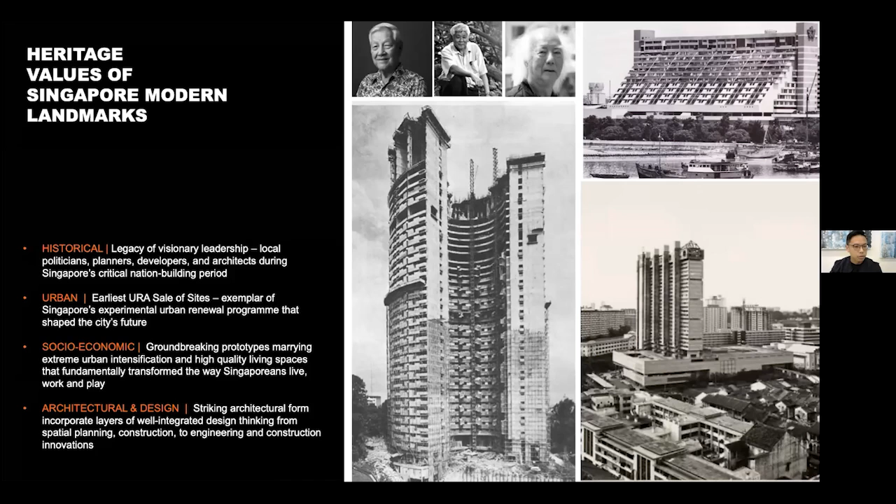So we invited overseas speakers, Historic England, Urban Splash, and we also held tours to look at some of these endangered buildings. Now, what we want to talk about today is the heritage values of our modern landmarks. Why are we so interested in them? Because they have an inherent value, because of their significance in our early urban renewal days. So that's why we're looking at that.

And the issues that surround them, basically, we don't have a comprehensive grading system. We have this, which is why it's also underappreciated, right? And there's also very poor management of the buildings estate, and also land use laws that sort of encourage speculative collective sales of these buildings. So these actually sort of led to the decimation of many modern landmarks in Singapore. And as you can see on the image on the right, most of them have been either demolished or some of them have been threatened, right?

So one of our first projects that we looked into was Pearl Bank Apartments. Pearl Bank Apartments, for some of you may know, is actually a groundbreaking prototype, right? Where you have split level maisonette units, right? And it also has a very groundbreaking broken cylinder kind of form that captures breeze and maximizes views to the outdoors. It was actually sold to a developer in Singapore called CapitaLand, right?

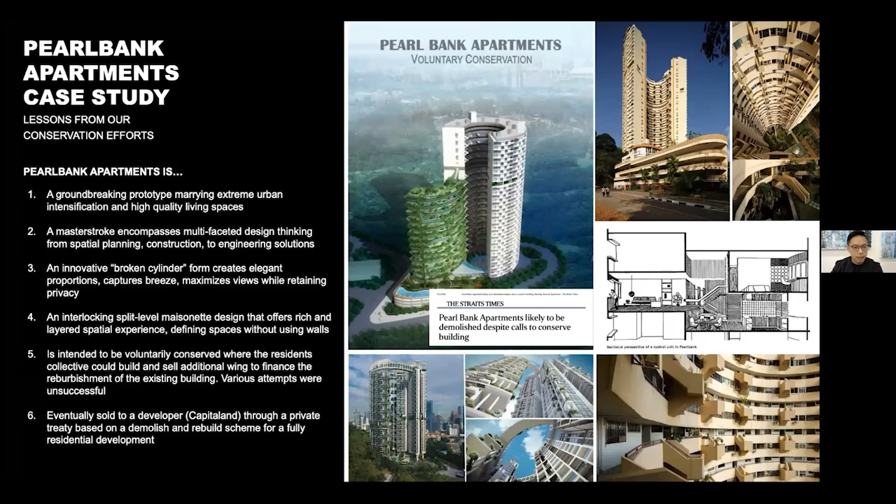And what we did was that in the background, we tried to persuade the stakeholders, CapitaLand, together with some of the authorities, to try to persuade CapitaLand to see what else can they do to the building in order to keep the building and not tear it down, right? So we looked at alternative schemes of assisted living because of its proximity to a hospital, all right, and trying to persuade them and see, hey, why not retain some of the building for this purpose, right?

And we also looked into, and we worked with an engineer in Arup, right, to see how can we sort of decant some of the building area to become useful GFA, and how do we take out some of the building in order to input new units that could cater to the new market, right?

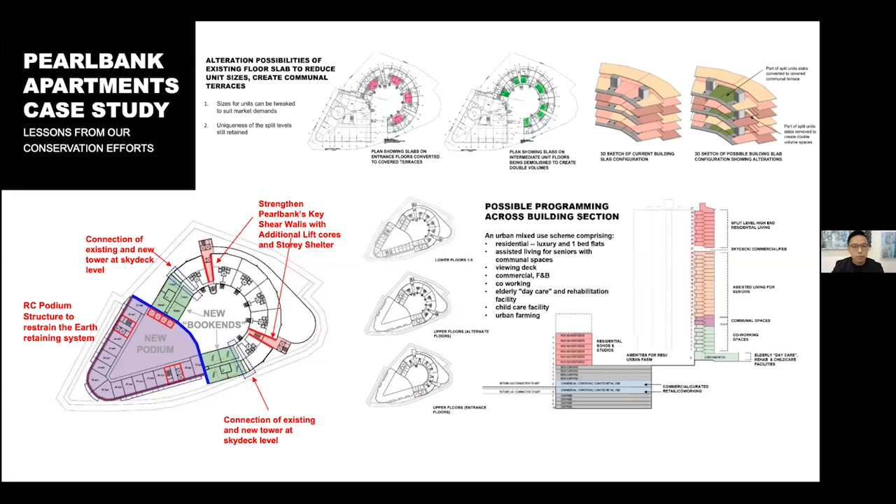So these were some of the efforts that we went through, but finally our efforts fell through because there were a lot of stumbling blocks, and there are primarily four issues. One is the lack of political will, lack of finances, lack of technical knowledge, and the lack of time. So these were somehow the take-home lessons that we got that sort of informed us what we should do for future advocacy work of this kind of nature.

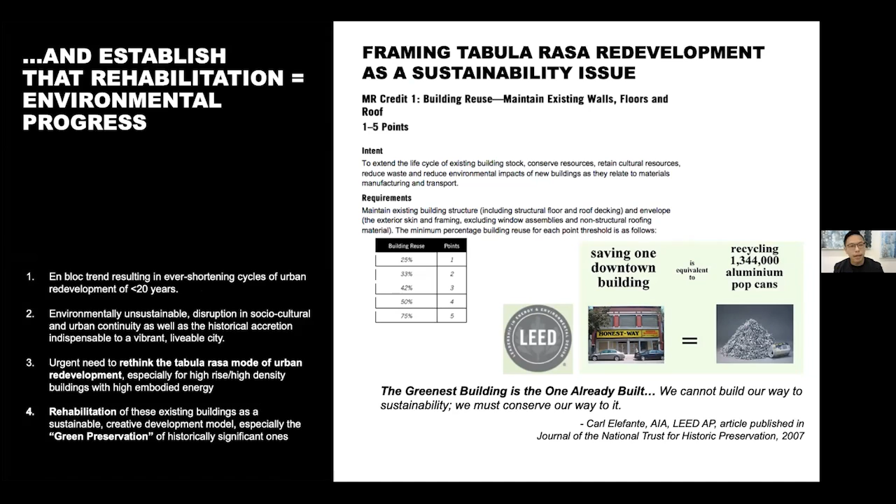So to conclude, I think moving us forward, we need to address policy issues. There are many things involved, like listing and documentation of these modern heritage buildings, coming out with frameworks for developers to adopt, right? So these are things that we need to look at. And finally, of course, we want to establish that rehabilitation equals environmental progress, like what Kara has said just now. So we are definitely aligned with the international community that conservation is in fact a way of environmental conservation as well.

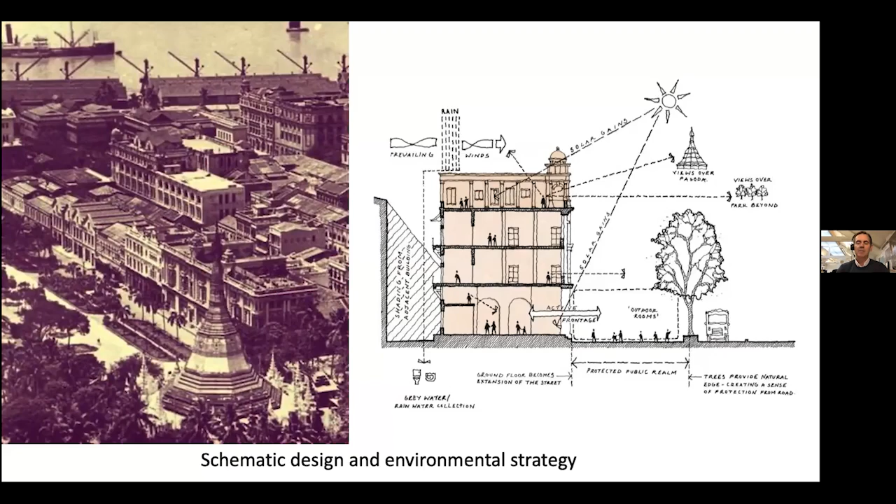100 years ago, it was part of a green city with shady pavements and a walkable street life. And we wanted to get these qualities back by opening up to the street, by creating low energy office space, and by maximizing the potential of the roof terrace. We also wanted to share a vision for the future to persuade stakeholders to support the project.

Internally, we felt that restoring key spaces sympathetically could add real value. This included the best of the historic interiors and using them to inspire new design interventions, but also that traditional environmental controls like opening windows and ceiling fans could play an important part in creating comfortable space.

And of course, we wanted to make the most of the roof terrace to enable the public to enjoy the views over special spaces, and of course, to create a selfie space to encourage people to come and engage a memory in a newly created city space.

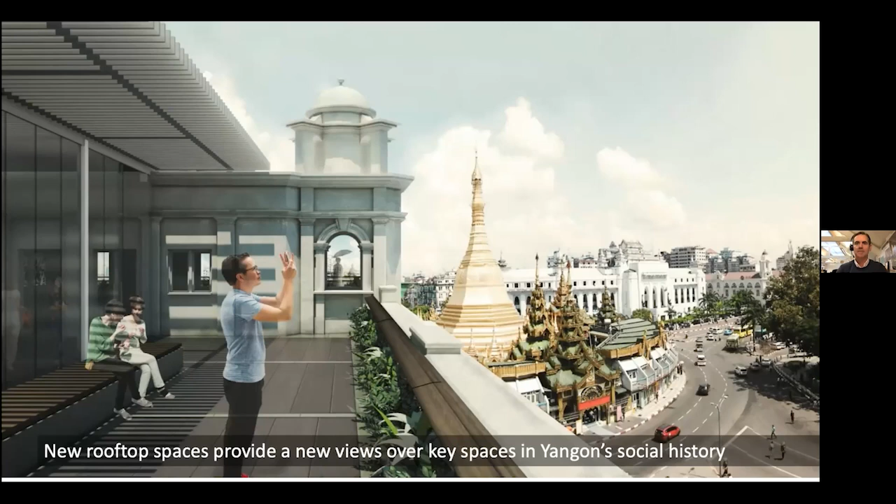Now, as part of the site works, vocational training was something that was very important, and it ensured that the restoration was undertaken to the very highest standard. It also ensured that the construction industry gained important new skills needed to repair many of the other important historic buildings across the city. So the project developed skills, and it also revealed skills that already existed.

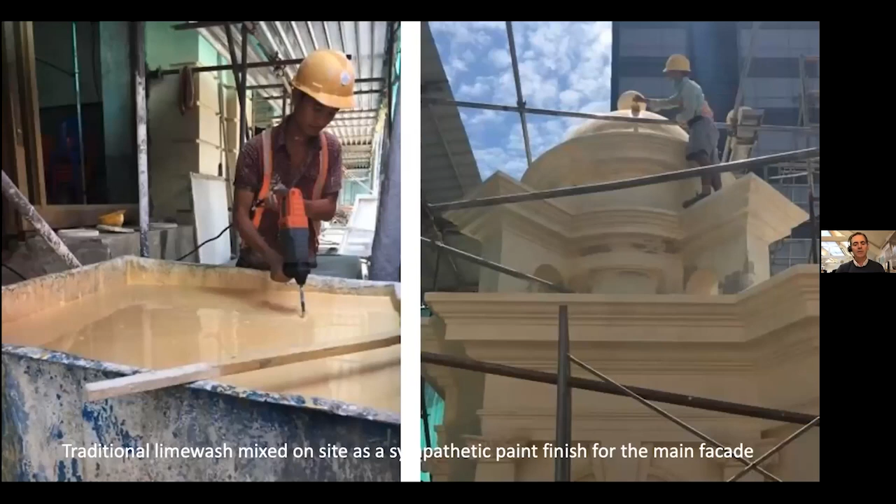And after repairing the main elevation, the training extended to traditional decorative elements. And here we can see lime wash, traditional paint being mixed and applied on site as a finishing coat.

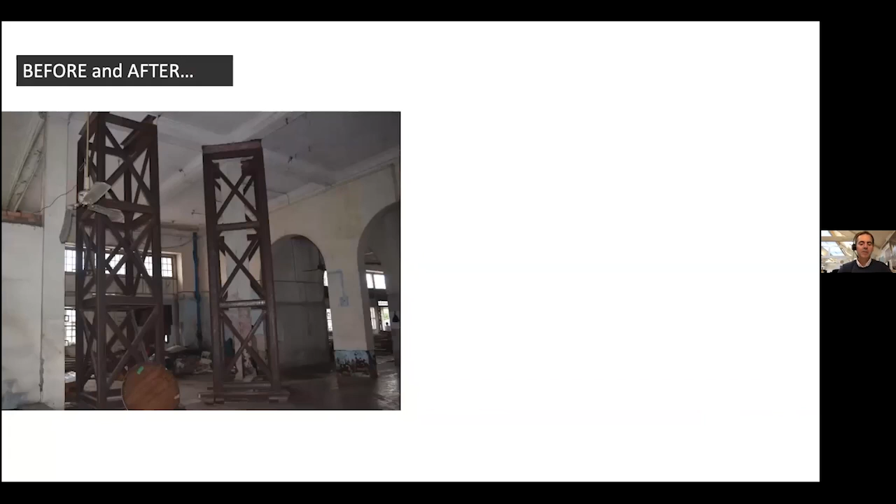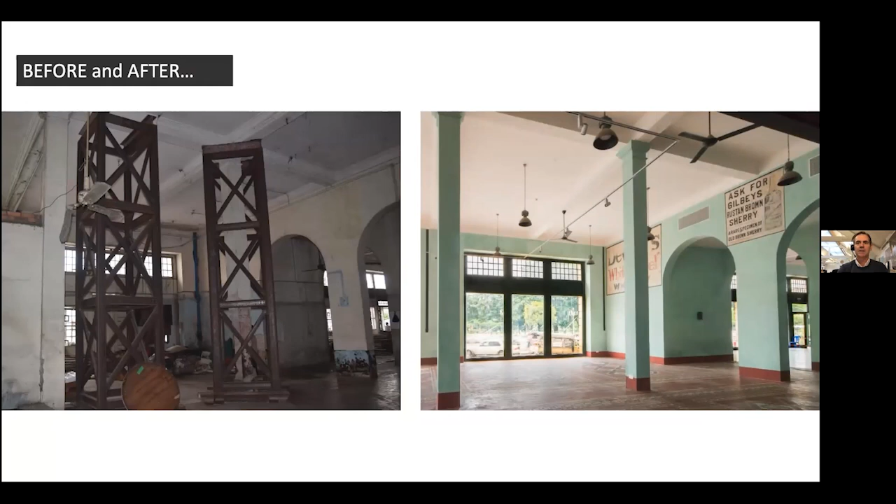And at ground floor, spaces which had been neglected and structurally propped have been carefully repaired. And here you can see some of those decorative floor tiles from earlier and some of the historic painted advertisements which were revealed and restored as part of the process. And those shop windows which now open up onto the street.

The project was opened in September 2019, and one of the key outcomes is that it now provides great space for new economic and social activity in the building. It literally has come back to life with new uses for all kinds of people in the community.

The second key outcome has been its demonstration of sustainable development. This image shows how we've responded to some of the UN Sustainable Development Goals, which has been an important way to start a new conversation for Yangon and to measure that in an international context.

And many historic regeneration projects have this opportunity. But most importantly, the project has changed people's lives. It trained over 500 people from professional design services to craft skills, including international and local expertise. And here are some of the project team on the scaffold at the end of the job.

But most importantly, I think the project demonstrates how saving global heritage can create important possibilities for professionals, building owners, politicians, and the community. And I think it's a great example of how heritage buildings can be repurposed for exciting, valuable, and sustainable reuses. Thanks for listening.

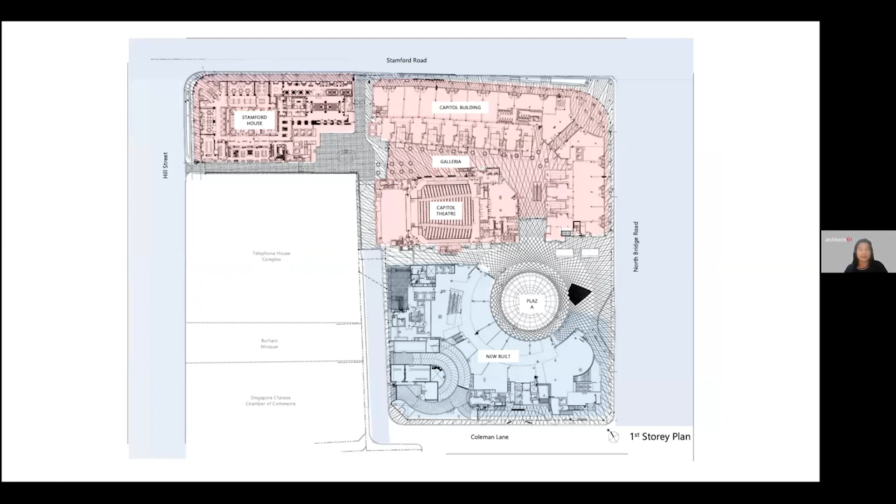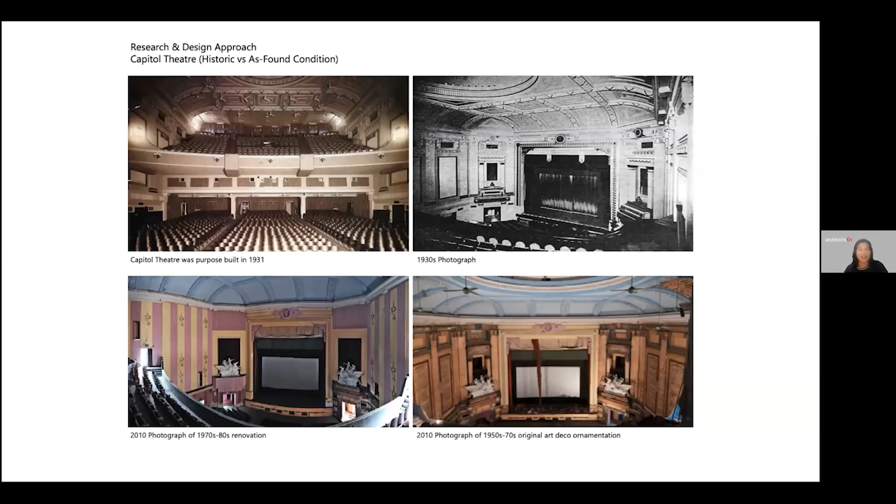I will share on the historical use of three buildings: Capitol Theatre, Capitol Building, and Stamford House, the restoration process, and how challenges faced were overcome to retain the original use in these buildings. Capitol Theatre was purpose-built in the 1930s for live performance theatre and cinema function. It was a building with ceiling fans and ventilation openings around the dome and sides. From the 50s, Art Deco features were added. However, renovations in the 80s covered these features. The last movie was screened in 1998, and the theatre was not in use for more than 10 years.

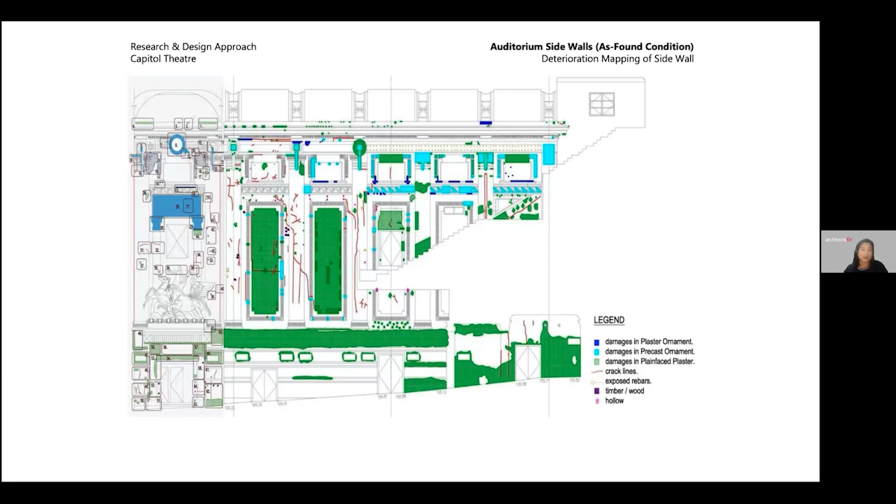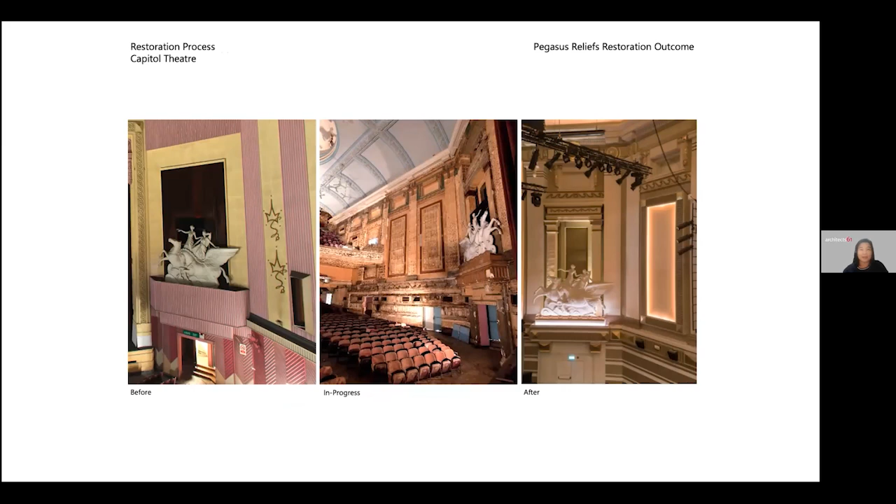We at Architects 61 were mindful of the rich heritage of these buildings. Many have fond memories of these places. Having done similar restoration work to landmark buildings, we were aware of the need for sensitive restoration. We found the walls to be in poor condition. 3D laser scanning and reverse molds were used to carefully retain and repair these Art Deco features in situ or prefabricated. Over the years, thick painting blurred the fine details of the Pegasus, so the many coats of paint were carefully scraped off, damages repaired, and the Pegasus was given a fresh coat of paint.

I was pleasantly surprised when we found some old ceiling marks on site. With this discovery, we reinstated the historical appearance using new acoustic ceiling panels, complete with gold gildings, to meet the cinema performance requirements. The old fly tower was demolished and replaced with a new one. In doing so, we had to make sure that the proscenium was well protected, especially from Singapore's wet weather.

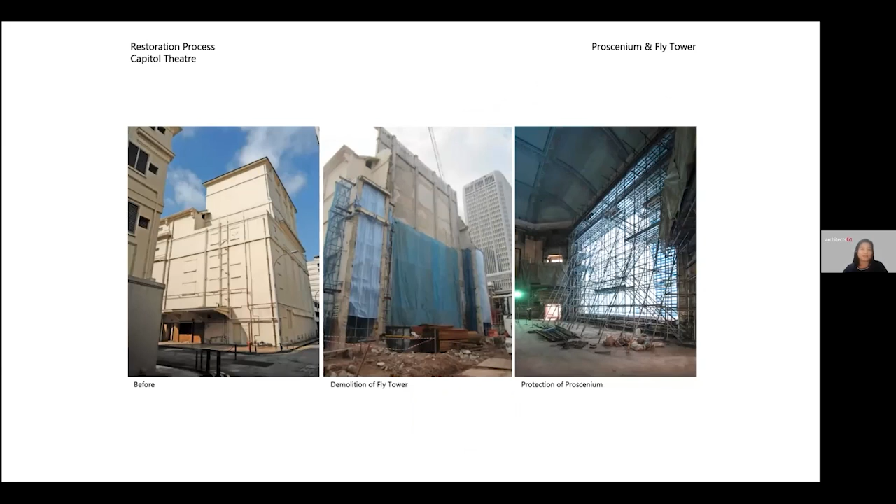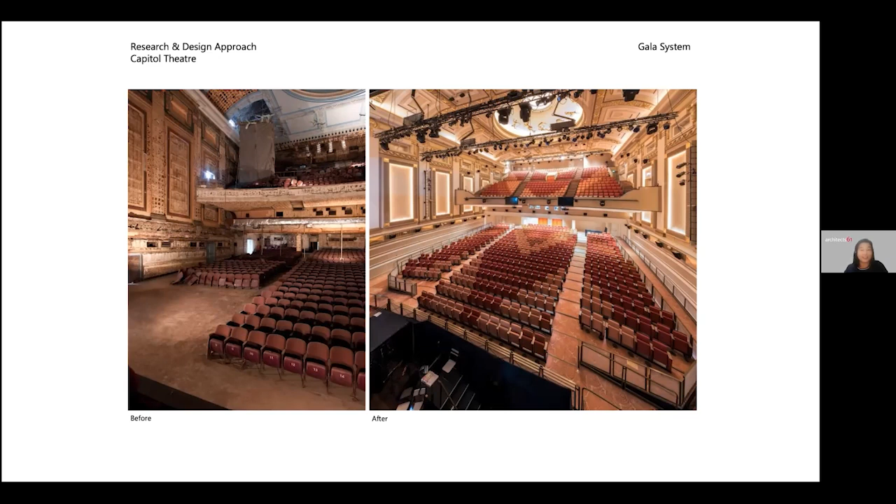One of the challenges here was to excavate a pit while keeping the structures intact for the rotational floor system. This allows the stall seats to be turned over and tucked under the floor for flexible seating configuration, including flat floor mode for wedding dinners. So Capitol has retained its original use, complete with the restored Zodiac painting and the original ceiling fans still in place.

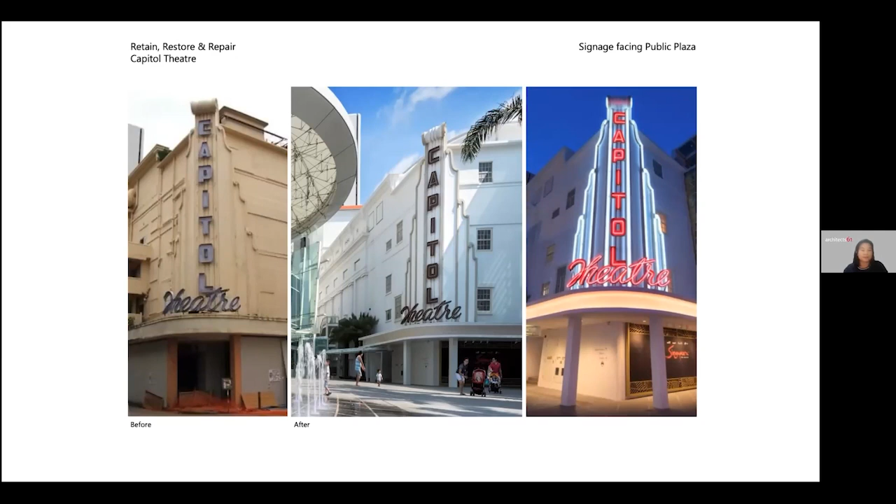One cannot miss the revived Capitol Theatre neon sign facing the public plaza. This plaza has a radiating floor pattern, which blends the new and the old in the entire development and creates vibrancy at pedestrian level for public activities. Here, with the new Galleria skylight, the once mundane back lane is now transformed into a lively place for alfresco dining. Capitol Building is once again a place for shopping and dining.

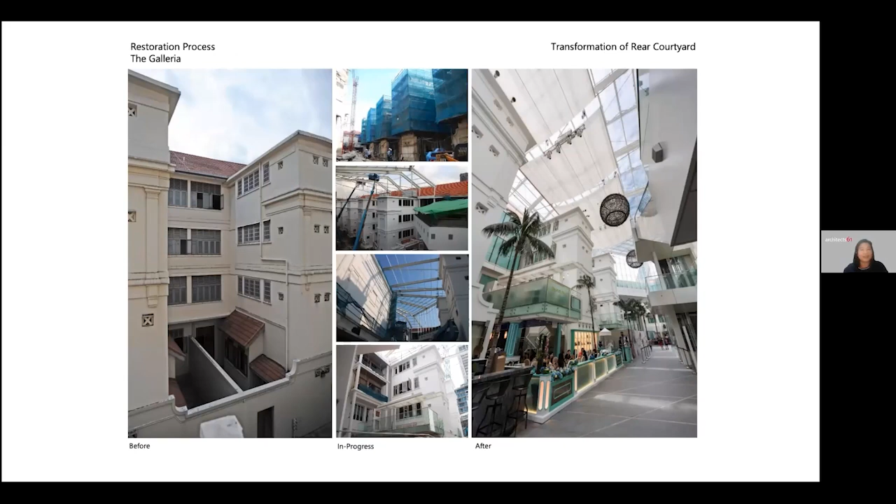From a distance, the changes in the before and after photos are not apparent, but there were significant efforts to restore these buildings. Second layer acoustic windows were added to levels 2 and 3, while retaining the first layer conservation windows. This was done to meet the needs of the hotel guest rooms facing the road.

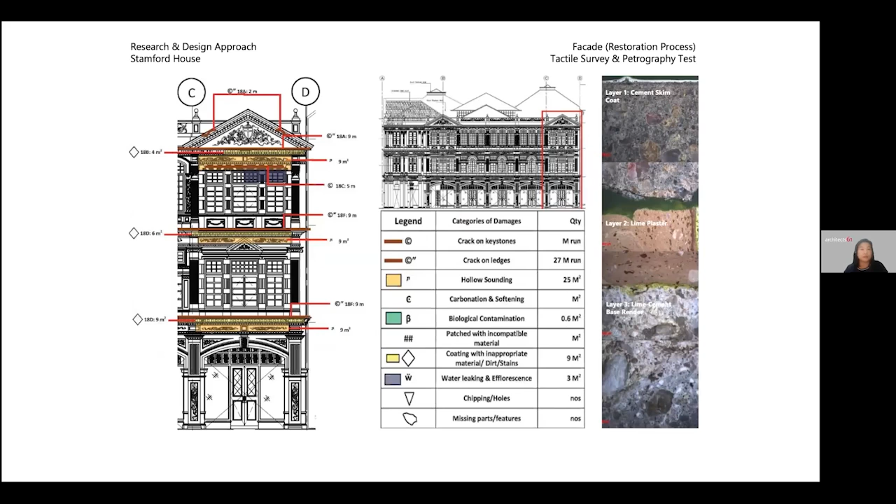Capitol Building has retained its original use at level 1, with all the shop fronts restored. The original structures were strengthened and the existing timber floor joists were retained. We conducted tactile survey and petrography tests, which showed that the brick walls were damp and soft upon the removal of the cement skim coat layer. These gave us a good understanding of the facade condition.

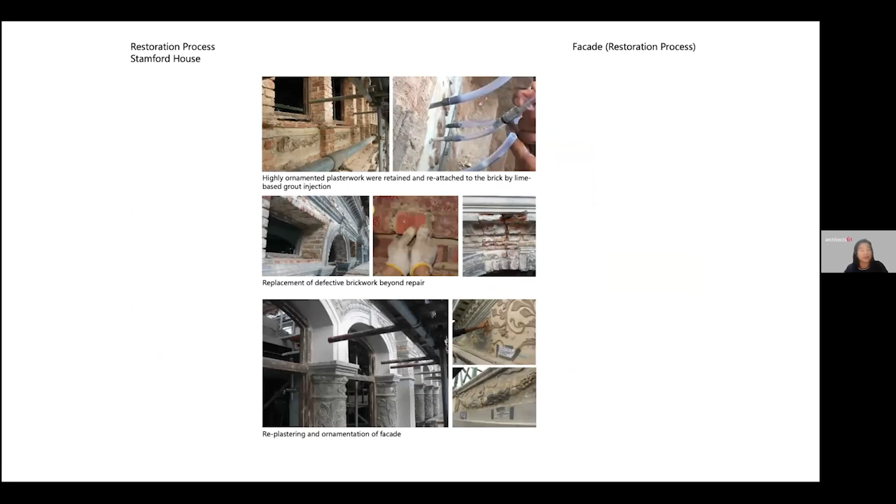I enjoyed site walks as we sighted the various stages of painstaking restoration work in action, like the repair of the plasterwork and the restoration of the highly ornamented facade. Due to ownership changes, the original interior layout changed several times. Interventions and modifications were introduced, such as the removal of the escalators and some columns. We added the atrium smoke barrier and a new swimming pool at level 4. So Stamford House is once again a hotel.

It is possible to retain original uses in buildings and sites. To do so, certain challenges will have to be overcome and solutions informed so that heritage is sustained into the future. With this, I end my sharing session. Thank you.

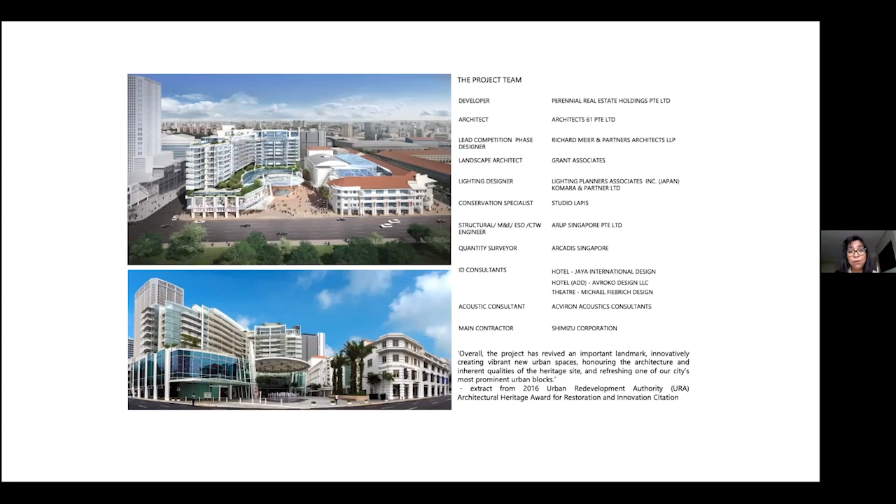Thank you, YK. It's really fascinating insight into the Capitol development. I must go and visit when I'm next in Singapore. We are now moving further north. Our next speaker is Jigan. Jigan is an associate and deputy chief architect at RIBA, based in China. He has extensive experience working internationally, both in Asia and also in Europe, on a variety of building typologies through different stages of design. Please welcome Jigan.

Hello, G. This is Stu here. Can you hear me okay? Okay. It looks as though G has had a bit of an issue there. Aslina, are you on the line? I am on the line. We're going to move to Peng Peng and we'll come back to G when we get him back online, if that's okay. Okay, absolutely no problem at all. Okay. Peng Peng, I'm going to hand this over to you.

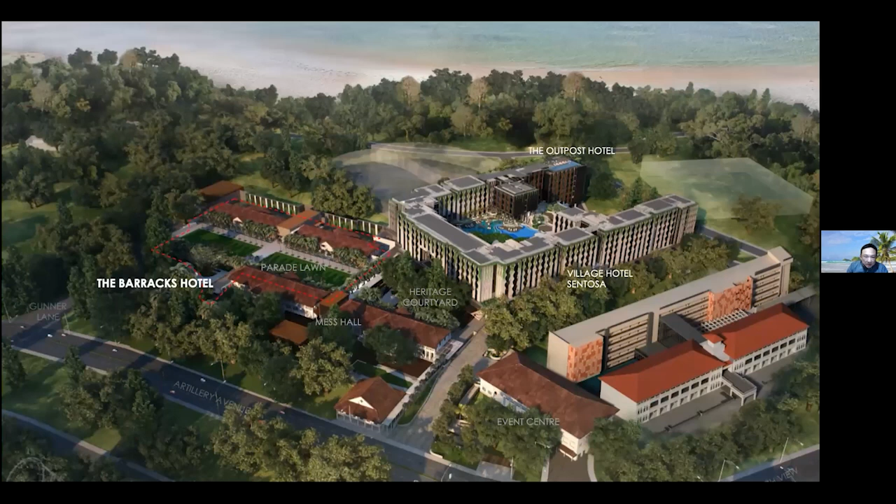And so this is the site when we found the project. If you look at this site, the rooftops in orange are all the conserved buildings. On the north is Resorts World, which is a big integrated casino. And this is the site. And we were asked to really conserve all the buildings in front on the ridge.

And the way we had done that was to build over the depression, but also kept the strategic parade square conserved, but in a new way. We thought about the hardness of the parade square becoming a soft lawn that could be a setting for a new kind of parade, a new kind of march, which was our wedding march.

And this place used to be the mess hall for the officers. It's become a new dining destination where cuisines from all over the world could be experienced. And the trees on the site were also part of our setting, and we conserved all the big trees on site and used the trees strategically to create an environment that was very close to nature.

And over here at the deepest part of our resort, we created a walled compound just to shield us away from some mechanical plants of a neighboring complex, but also to create like a secret garden, a garden that felt like a fortified garden, but a sanctuary for the resort.

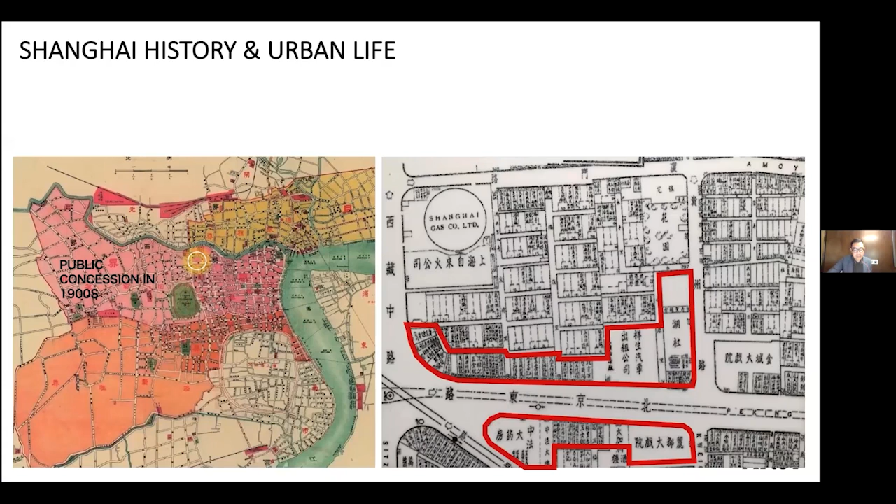Hi, this is G from China. Today, I'd love to share some experience about heritage buildings through one of our most recent renovation projects in Shanghai. About 100 years ago, there were several concession zones in Shanghai, and international architects designed many buildings here. And those buildings were not pure Western classic style, but also combined and considered some of the local lifestyles, such as the Lane House.

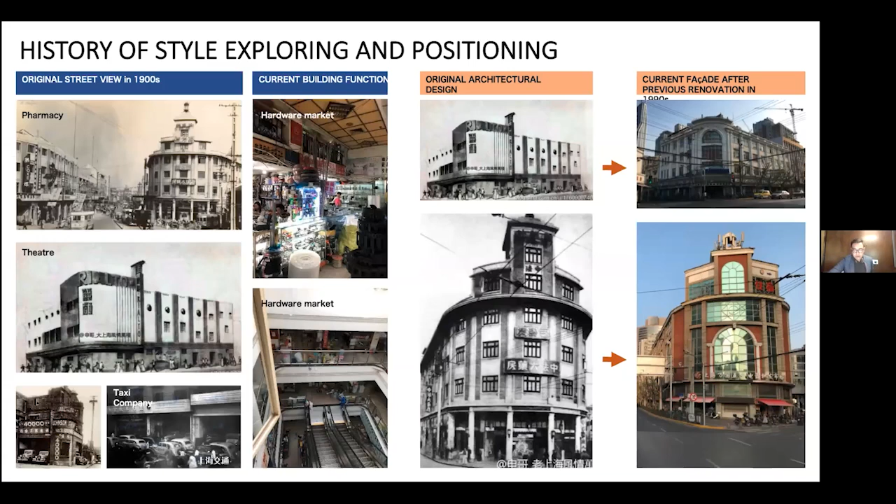The Lane House in Shanghai became a very unique architectural style, and a lot of people live in Lane Houses. From the site photo, you can see an old lady still living in this building, and she has her roof garden on the top. And our task was to renovate 8 buildings along a 200-meter historical street. In the very beginning, those buildings were a pharmacy, theater, taxi company, but nowadays the buildings are used as a hardware market mixed with residents.

And through 100 years' time, some of the buildings lost their original architectural aesthetic and values, becoming fake historical buildings. So how can we choose a right method to restore the valuable history? Build as original, or build as old, or build as new? For example, this building: the facade elements and the decorations are lost in the history, but the overall building and the facade geometry still kept the original rhythm.

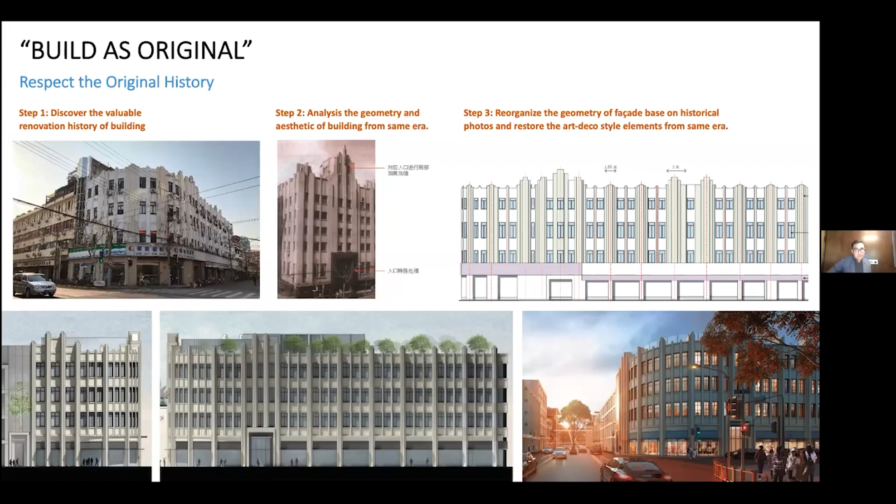So we did a very deep dig into the history from the archive, the historical photos, and also we analyzed the geometry and the aesthetics of buildings from the same era. We reorganized the geometry of the facade on the historical photo and restored the Art Deco style elements. So these buildings, we call it build as original. We think that's a respect to the original history.

And talking about build as old. So, I can't see the page change. Okay.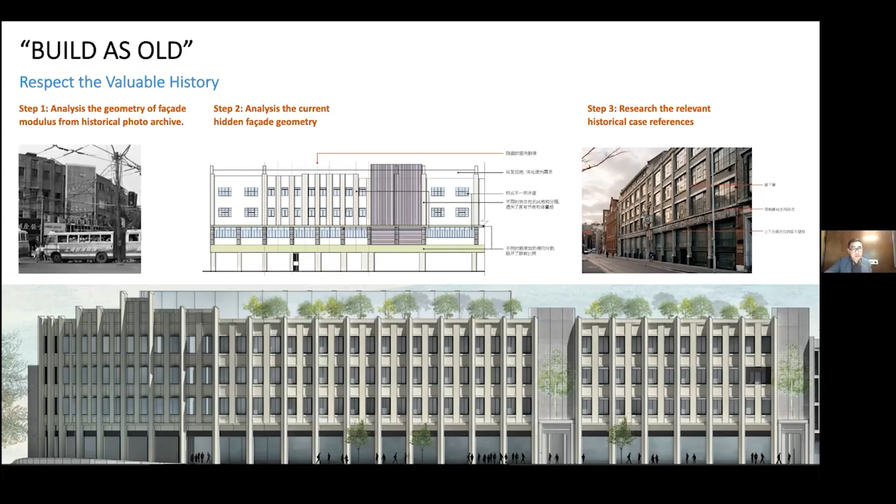Next slide. Okay. So

In this page, we can see those buildings on the corner. 100 years ago, that was quite a modern design. But in the 1990s, it became a very awkward, fake European style and was used as a hardware market. Originally it was a very famous theater. So we plan to restore the function and use it as a theater.

Okay. Okay, yeah, it seems like G is having another problem with the internet there. G, let me just check one more time. Can you hear me okay? Oh dear. Okay, Azlina, over to you. Yes, okay, we'll come back to G at the end to give him time to see whether we can get him back. For now, I'm going to hand over to our next speaker. Sorry for this, but I think it's part of the world we live in today. We are at the back end of technology.

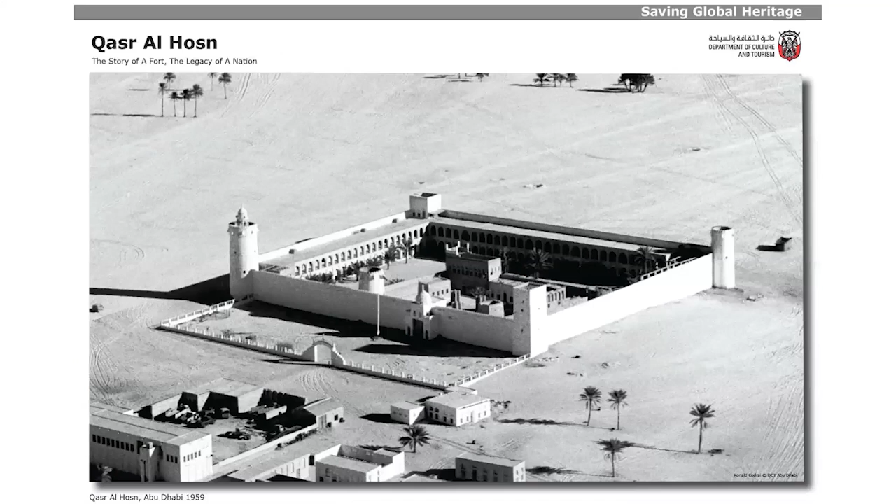At this point, I think we should also be mindful of the categorization of heritage by UNESCO, those being tangible heritage and intangible heritage. This case study is a key example of an immovable, tangible heritage, an architecture which has been strongly informed by the rich intangible heritage of Abu Dhabi, the human treasures that we carry within ourselves.

Qasr Al Hosn is a physical timeline of the story of Abu Dhabi. It's a building that started in circa 1760 as a watchtower, which marked a potable water supply, which became an impenetrable fortress in the mid-1800s and evolved into the ruler's palace in the mid-1900s, and remains to be this Emirate's cultural heart to this day as a museum of this people and the place.

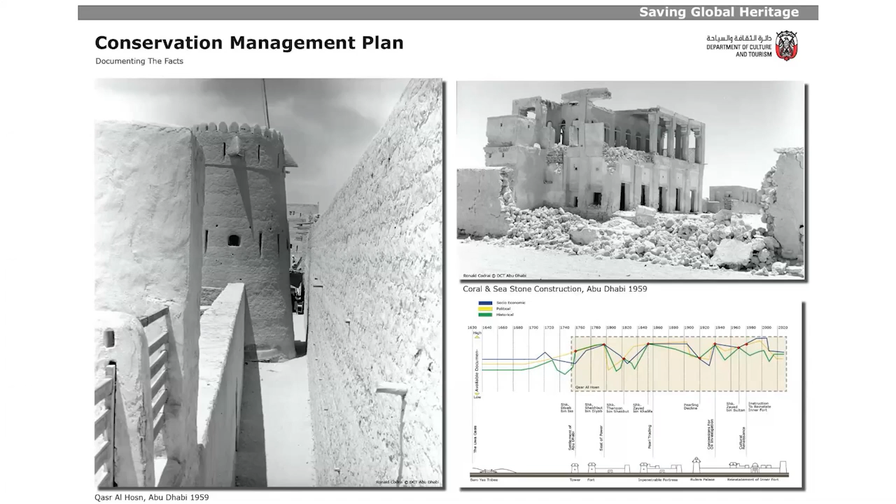The project commenced with a detailed conservation management plan, which, through the engagement with the local community, National Archives, and by undertaking physical investigations into the building fabric, enabled us to understand the significance of the structure, the sequence, and the substance of the enclosures and events that subsequently informed the conservation process. Undertaking the conservation management plan was a time-consuming labour of love, but it also made it abundantly apparent how much the local community held this building in their hearts.

Qasr Al Hosn was and remains to be the epicentre of their daily lives, a building that is treasured like a communal heirloom that generated stories which have become lasting memories transmitted by word of mouth from generation to generation, thereby creating a symbiotic relationship between architecture and humanity, the tangible and the intangible, the physical and the metaphysical. Storytelling is something that a qualitative historical restoration process should enable a building to do in its own right. In this regard, we believe that Qasr Al Hosn is an exemplar.

The concept design was to express the fabric and the authenticity of each of the building's eras of evolution and phases of construction. This would then enable the building to narrate to the visitor the political, social, and economical developments of Abu Dhabi through the fabric of the building, which witnessed a small sea-edge settlement morph into a modern metropolis.

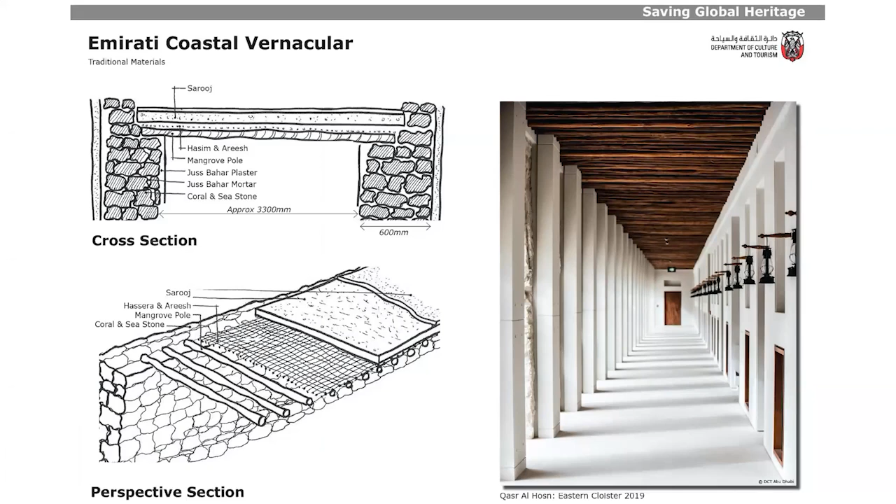The architecture of Qasr Al Hosn is of a vernacular origin, utilizing coral stone from a nearby reef for its masonry walls, mangrove poles from passing traders as beams for the floors, and the fabrication of lime mortar and render from the surrounding flats of gypsum, white sand, and crushed seashells. This render then gave rise to the building obtaining the colloquial name of the White Fort by the passing mariners who would sail by the Arabian Peninsula.

In the 1980s, the building was poetically transformed into an Abu Dhabi archive. The building, being a place of community memories, would now be a receptacle for the memories of a new nation, a nation that would be governed by those who sat in a modernized council chamber located immediately outside the building's walls. At this time, the historic fabric was informed by the introduction of modern materials such as concrete, engineered timber, and contemporary building services, trading traditional passive cooling techniques for more immediate modern mechanical means.

In order to conserve, restore, and reinstate the memory of the building, a team of experts from around the globe were gathered to undertake best practice methods of conservation. Artisans and craftsmen had to be carefully sourced and in some instances trained from scratch to enable the specialized traditional works such as date palm weaving, coral stone laying, and timber carvings to be undertaken in an authentic and sympathetic manner. This process not only preserved the building, but the intangible heritage of traditional craftsmanship.

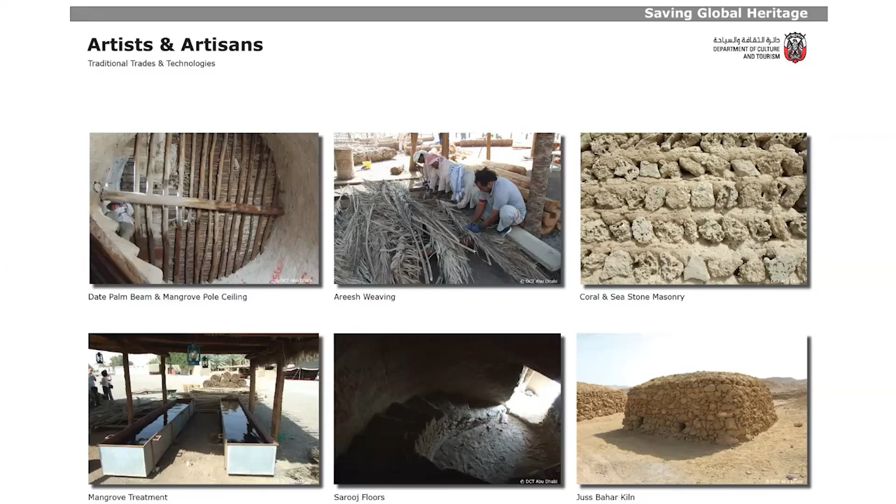The architectural composition of Qasr Al Hosn can be viewed as a series of layers and enclosures, which are intelligently composed to respond to the arid coastal desert conditions by providing passive cooling through courtyards, cloisters, and chamber walls to enable these interiors to become habitable spaces. The porous coral walls absorb the heat of the day like a calcified sponge and then dissipate the warmth in the evenings to mitigate the cold.

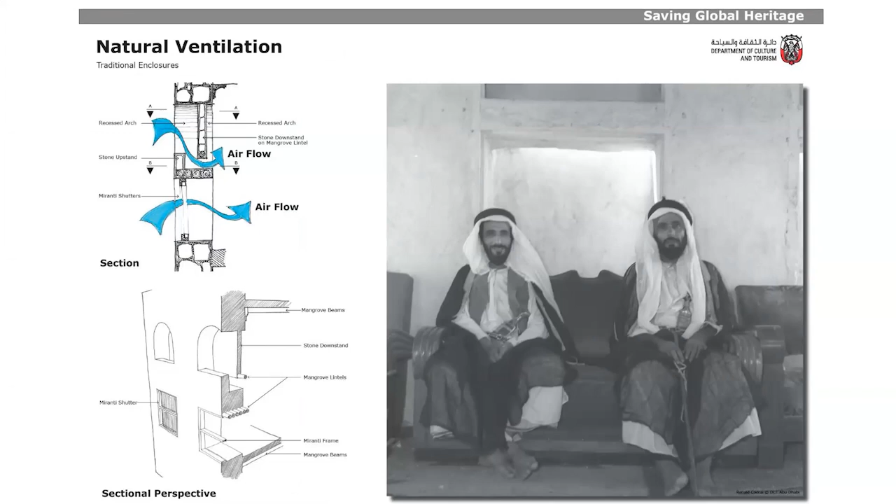The width of the rooms is predicated by the 3.3 meter maximum length that a mangrove pole will grow to. These dense timber beams are used to create narrow, lofty volumes, with thin slot openings in the external walls called bagiles. These devices channel a cool coastal breeze through a lofty volume to provide cross ventilation and enable the occupants to retain their privacy and shut the sunlight out by being able to keep the larger windows below closed.

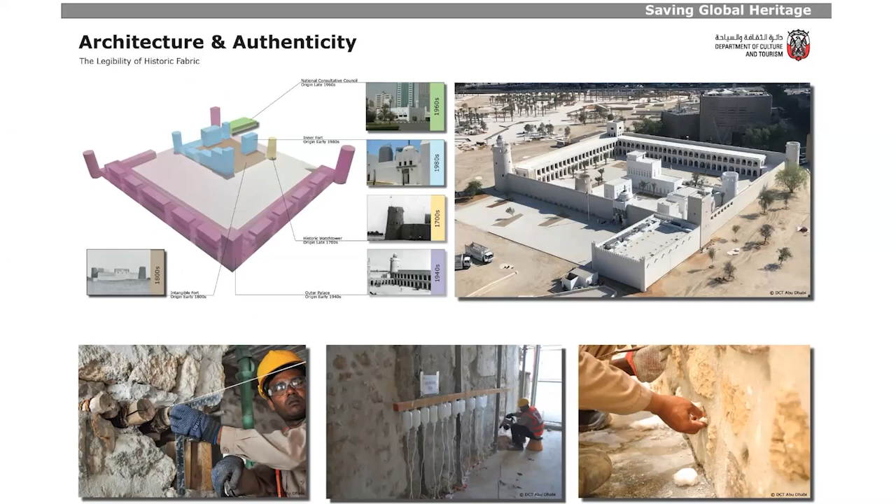The conservation policies and architectural concepts strove to present and preserve as much historic fabric of the eras of origin as possible. If fabric from the 1980s was adversely affecting the original fabric from a previous era, then it would be sensitively removed. If fabric of origin was in danger of becoming lost, then every measure possible was undertaken to retain it, even to the point of intravenously feeding resin back into historic timbers to reinstate their strength.

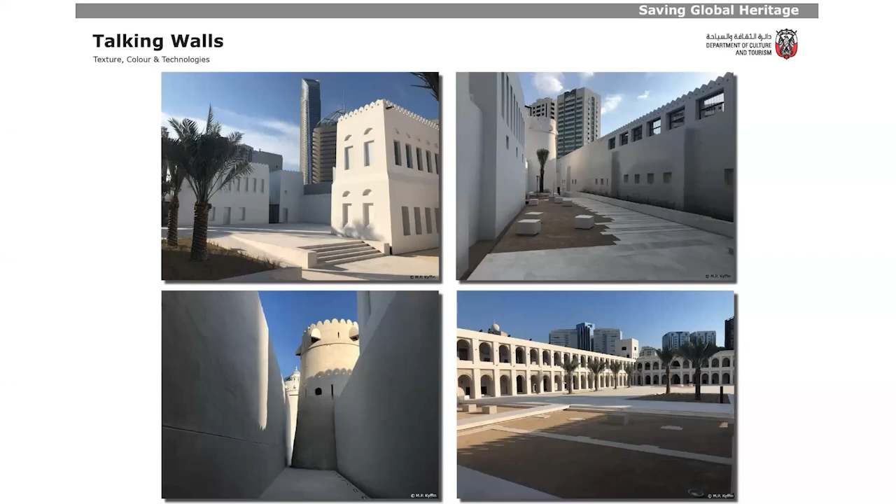The render treatment of the building walls has been conserved to their era of origin, but in doing so, they aid the visitor in their interpretation of the eras of construction. The changes in material, texture, and color are all related to a phase of the building's architectural evolution.

The dark brown render that we see here on the historic watchtower enables the oldest element of the composition to act as the anchor of the site. The founding structure of Abu Dhabi, which was first noticed in 1760, provides a sense of place and a significance that there are not many places on earth where you can physically engage with a structure that started a place

that united a nation. The tactile render of the outer palace walls transmits the honesty of the 1939 to 1945 coral and sea stone construction that lies beneath it. Walls that were built by a local community in times of hardship arising from the boats that would have provided passing trade connections with India being otherwise engaged in global conflict.

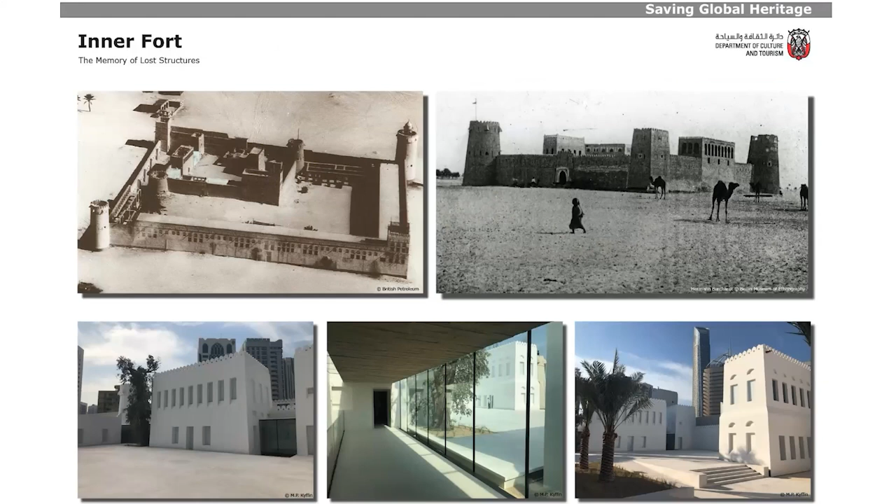The smooth white rendered walls are those of a more modern era. They represent the original fort which occupied the space in the 1800s. Through the use of modern materials and the sharp cornered smooth white surfaces, the building is readily identifiable as a later addition to the ensemble, and the glass links act as a memory of lost structures from the original and now serve as transitions between the gallery spaces.

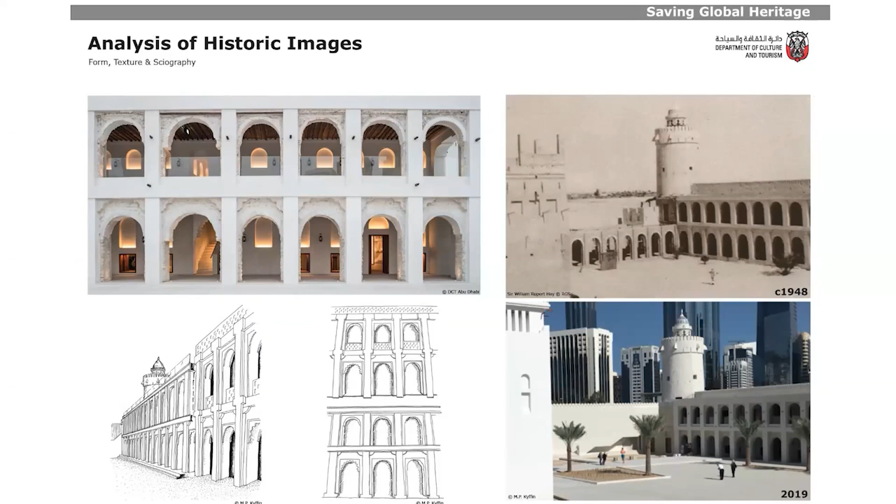An extensive amount of analysis was undertaken into high resolution historic images to help us with the reinstatement of details in plaster, render bandings, step facades, to undertake them as per their origins. Even studies into the depths and directional alignment of shadows were undertaken to identify the locations of lost structures and the thickness of render bandings that were in need of renovation on the facades.

Numerous archaeological findings were discovered during the works. Extensive investigations were undertaken prior to the commencement of works in areas where remains of lost structures were suspected to be. The remains of significant buildings have been showcased and interpreted for visitor engagement and understanding without fabrication of heritage.

The works to Qasr Al Hosn not only conserved the building, but its context as well. The landscape works served to reinstate the coastal desert setting in which the building was originally conceived, enabling the visitor to understand the vernacular and almost monolithic connection between the building, the people, and the place, which takes us full circle in this talk as Qasr Al Hosn still stands to this day as the cultural heart of Abu Dhabi.

As one would expect from a fortified structure, the building is strong and functional, but to fulfill the full Vitruvian definition of architecture, there is a beautiful manner in which these pragmatic and structural attributes are carried out. The architecture not only has utilitas, firmitas, and venustas, but has touched the hearts of many through memory, meaning, and its timelessness. Thank you.

Thank you, Mark. That was very good. Thank you. It is a beautiful building. I very much enjoyed the tour that you gave earlier this year. And I really love those old photos as well.

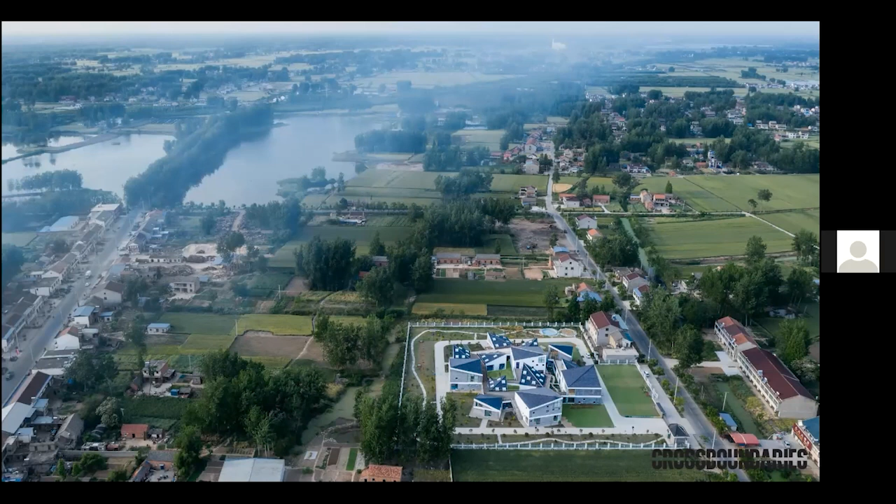Hi, Dong. There seems to be a 3-second delay, so if you just want to bear that in mind. Sorry to interrupt. We'll add another 10 seconds onto your time. Okay, sure. So now, okay, now we're back to the first picture with the bird view. Are we on the same page?

I hope so. From this picture, we can see it's a typical countryside in south of China with a morning fog. And you can see most buildings here are 1 or 2 floors of bungalow buildings, either private houses or workshops. So when we were called to build a kindergarten here, this is a 5th tier city or town in China.

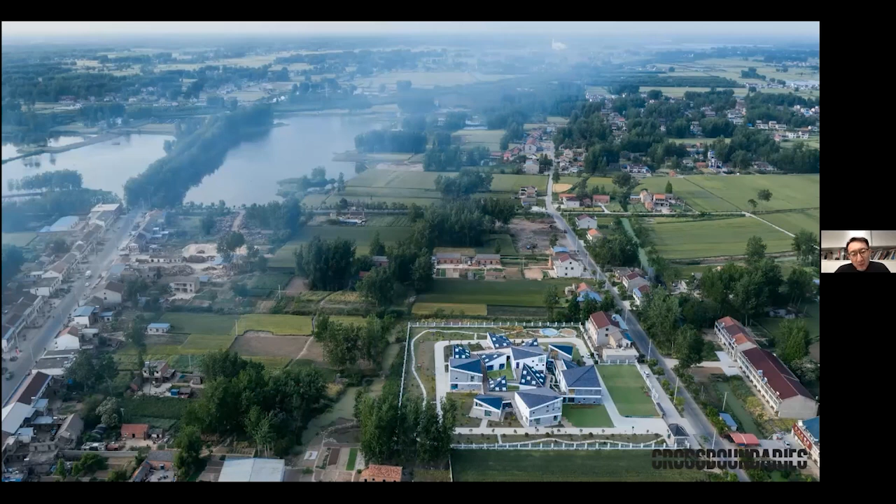So instead of, as everyone did in the neighbor village, building a 3-floor concrete block with a crispy color outside, we were thinking how we turn this kindergarten to respect the neighborhood. So that's how we call it a village in the village. So instead of building a centralized concrete block, we constructed a cluster with all the classrooms independent, forming a group. So here you can see on the picture, also each building, we applied the local architecture style with a pitched roof, slope.

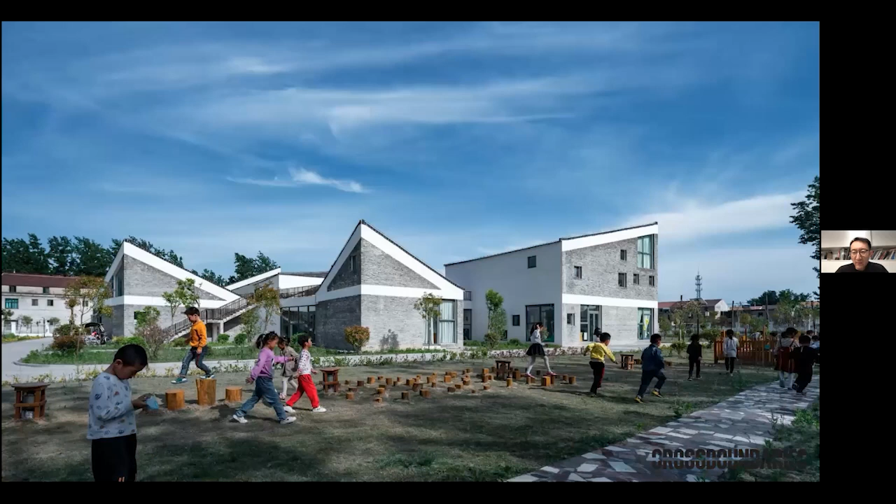As most of the Chinese rural countryside is experiencing today, most young adults and young parents have all left for the big city for a better life. So in all those villages, the typical situation is that the elderly and grandchildren are left. So how do we give life back to the village? So this is also when we were commissioned to construct this kindergarten. We were thinking, actually, with the openness of the kindergarten, this can turn into a community center at night, while during the daytime, the building functions as a kindergarten.

Oops. Next, it's not moving. Can you still hear me?

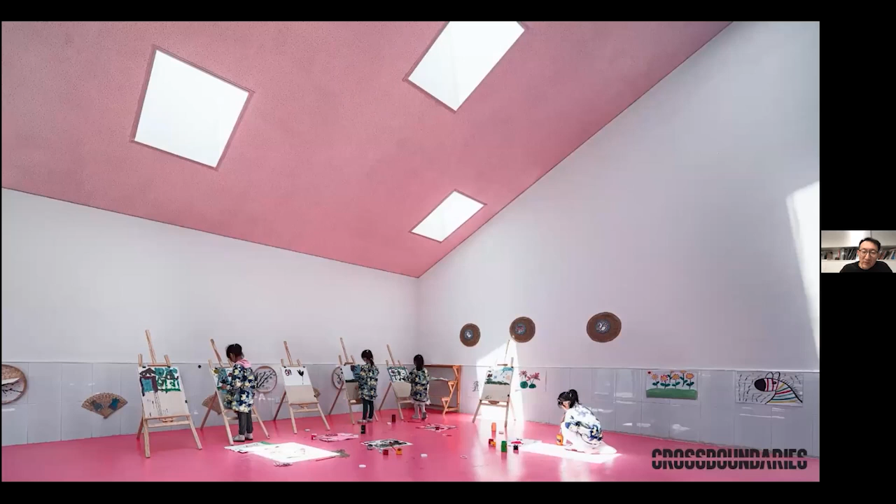Next. It is changing. It's just taking a second to catch up with you. Okay, sure. I just need to be patient. Still not on my screen.

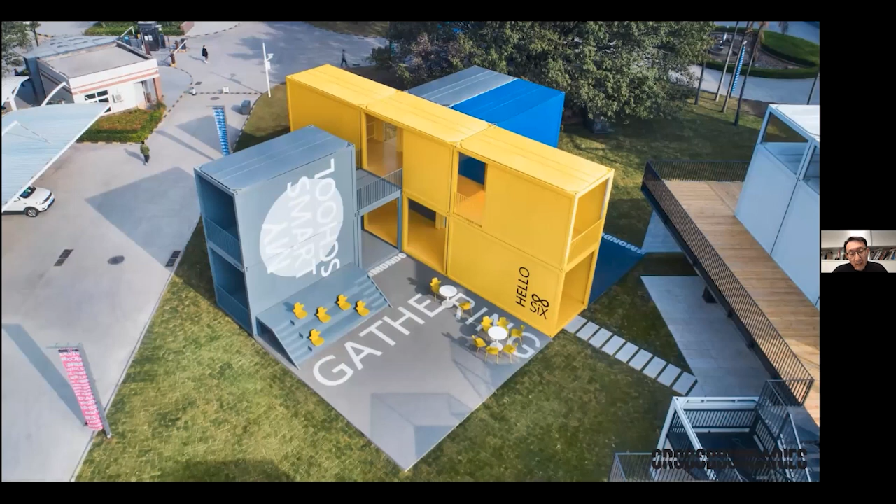Next. Okay, this is the new. While we are doing new, how we can save energy and save the environment, that's also something we consider. And this is the light structure we built last year for the Shenzhen Hong Kong Biennale 2020. Actually, it's a pop-up school. This structure doesn't require any conditions for the foundation. It can be built in the factory and constructed within 5 days. So this actually gives us more possibility to deliver pop-up schools. Particularly today, during COVID time, this structure can give more possibility for open-door, open-air learning space.

And for this space, we concluded 6 features. Because today, the modern school requires collaboration space, private learning space, and being very open to the outside to let the kids connect to the surroundings, and also being very communicative within the structure. And rich color and material for children to experience. So this is still sitting on the site, since even though the Biennale is over, the landlord decided to keep it as a pop-up learning center for their own company.

I will go on. So now you can see this is a gathering space and a sports space, all constructed within these 200 square meters. The limited square meters offer the maximum possibilities. Here you can see the yellow cross, which is the master plan for our buildings.

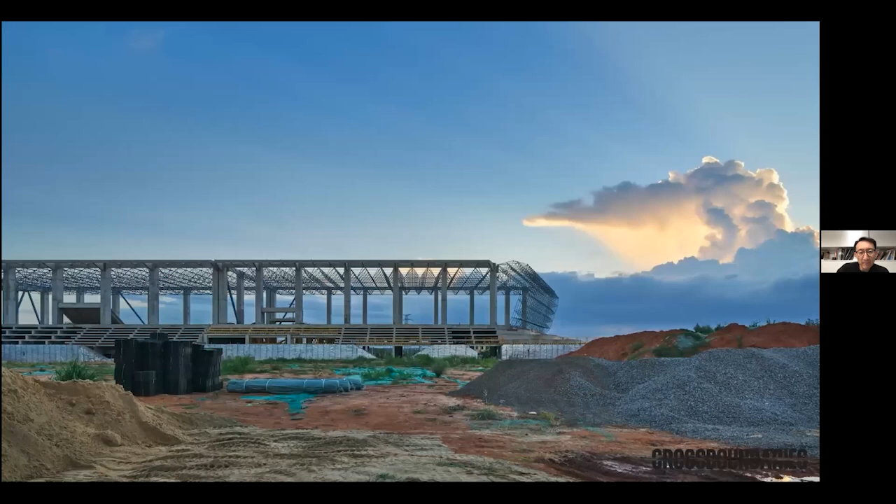And the last 2 pages, which I'm going to show, are actually a 110,000 square meter school we are constructing right now in Hainan, which is in the tropical area of China. It's an island. Even though it's a massive construction, we still take the local tropical climate into consideration. Here in the center, as you can see, the half-done steel structure offers an elevated building for natural ventilation, for energy saving. Plus, in contrast with the high-rise background, we provided a very horizontally extended school learning space. This is also an answer to the local structure and the local culture.

Okay, thank you, everyone. I hope the page reached the end. Thank you.

Thank you, Dong Hao. It did, and it was a fantastic presentation. And I really want to go to Hainan as well, the tropical. It was dubbed the Hawaii of China. Very much looking forward to going.

Fantastic buildings, particularly the one in Shenzhen as well.

We are now going to go back slightly south to Malaysia and welcome Mustapha. Mustapha Kamal Zulkarnain is the principal at Architect Mustafa Kamal Malaysia. Mustafa is a fellow member of PAM, the Persatuan Arkitek Malaysia, and is currently a member of the Housing and Urban Wellbeing Committee. He's also heading the task force in PAM's strategic plan for 2030, architecture cities now and future.

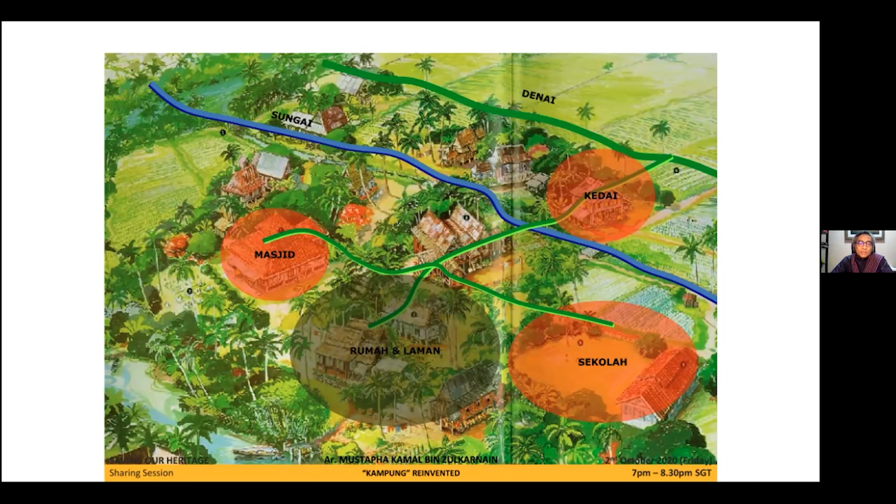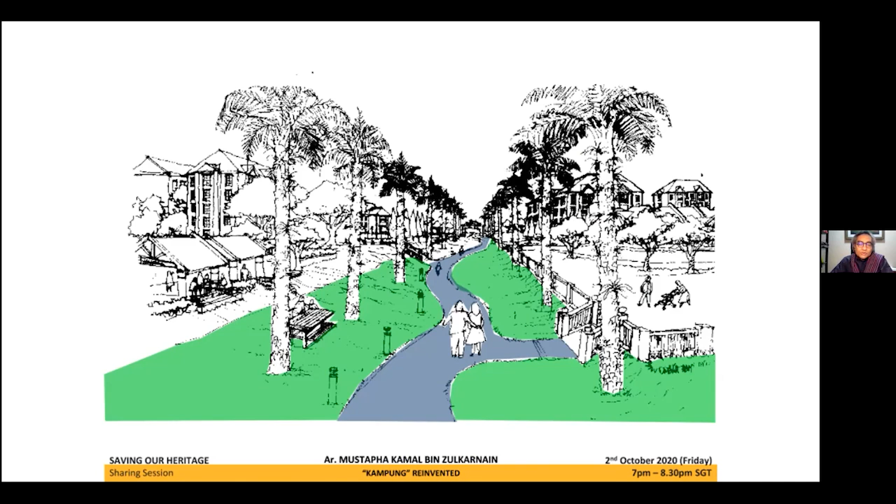These informal gardens are going to be the starting point that I'm going to rejuvenate and celebrate in our modern demands of townships. This is where the culture of the kampungs is now being brought into the urban scene. Starting from the house with the lots by itself, now it can be informal between clusters, or you can have a central open space.

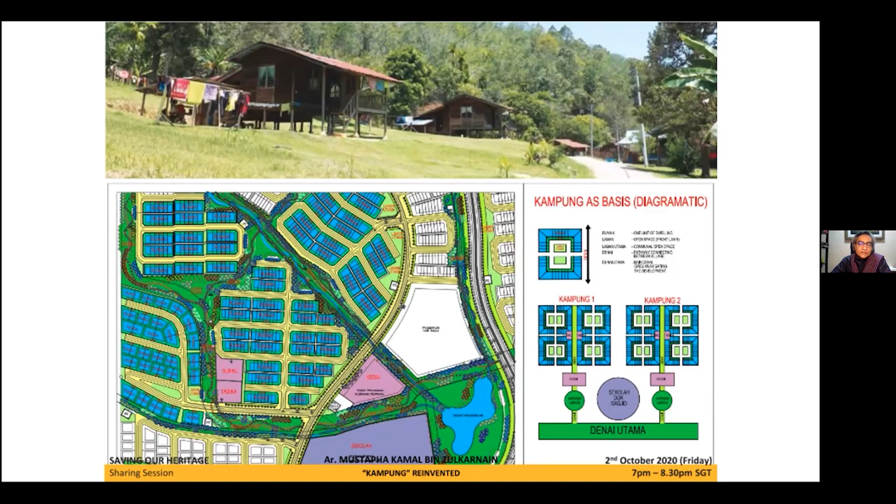But here in this township in Klang Valley near KL, we try to house about 450 hectares, and we use the kampung principle to create these buildings sprinkled onto the lawns and onto the landscape. Those greens are spaces in between, just like in the heritage kampung, where you have the blue way and the green way, and you have the thoroughfares. This creates the cross ventilation for the township. So this is what we are trying to enliven, rejuvenate and celebrate.

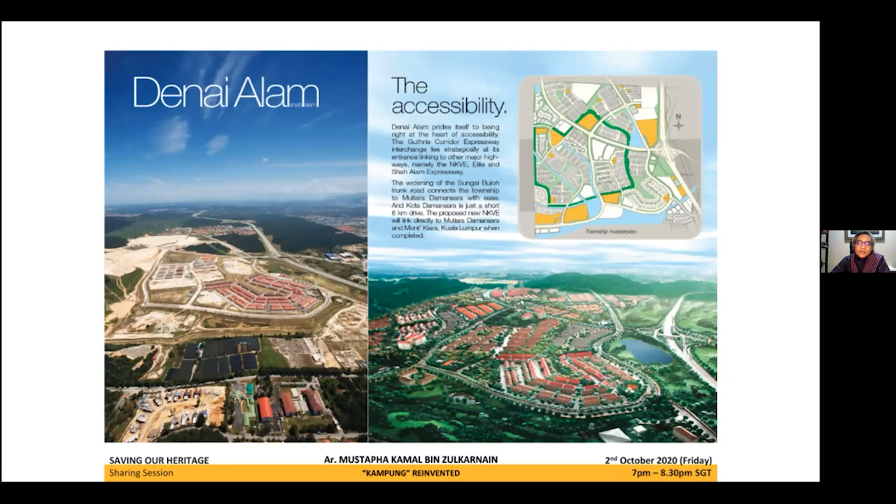From here, we even have the lakes to create the breeze and better usage even for the animals. I love it because there's a horse riding school next door, so the horses come here to graze the lawn. It is a circumnavigation of 5 kilometers of walking trails that creates this Denai. Denai Alam is an award-winning township with about 40,000 people staying here, on undulating terrain.

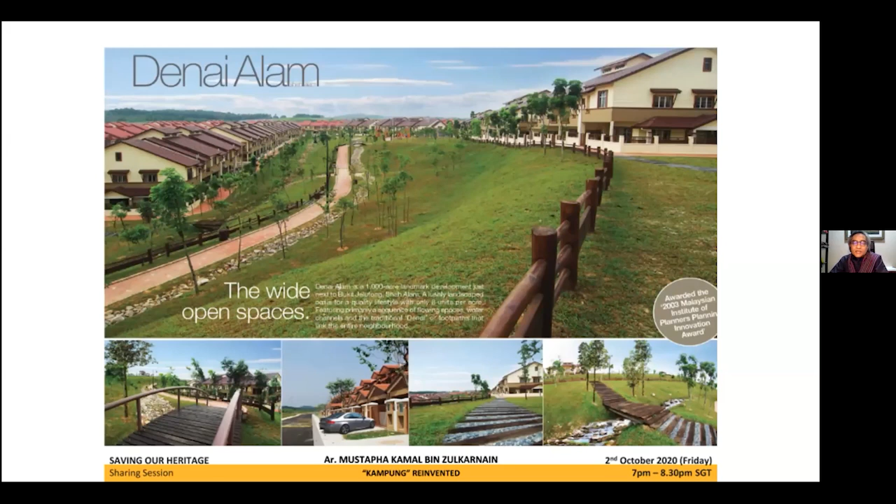So from that kampung principle, we try to take the best of the kampung and put it into an urban context so that people can still feel the essence of the kampung. The trails are part of the jogging track, where children can go to school, and also a security feature where the housewives can see who walks along the streets and the pathway. So you don't need to use the vehicle.

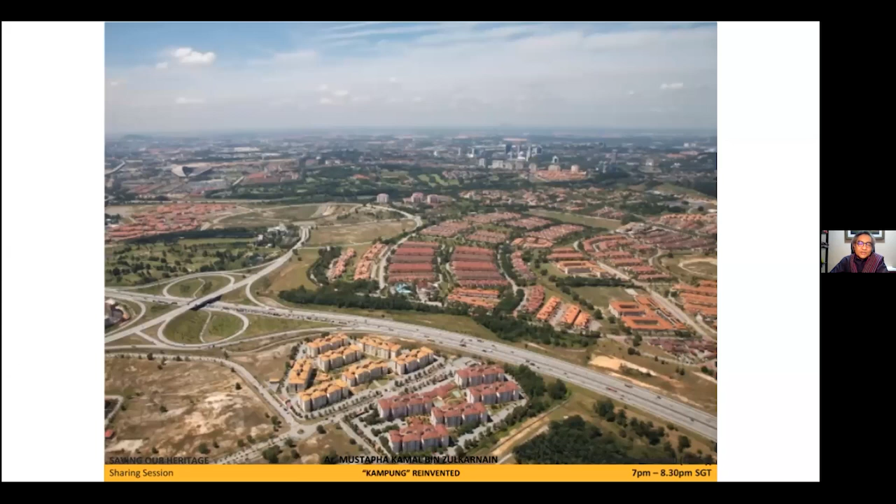You can see they're interconnected between the neighborhoods, the clusters of housing. You have neighborhood shops and green trails that go along. You can have a soccer field and a congregation of trees for recreation. Because in the tropics, you don't go out in the middle of the sun to bask, you try to run away from the sun, but you still have this breeze. So this is where cross ventilation is very, very crucial.

This is one of the ways we feel that, especially in the pandemic now, the kampong way can be used as healing corridors. The very strong greens and blues create cross ventilation around these 452 hectares so that people feel the breeze go through, the permeability of a township, just like in a kampong. So you have this beauty.

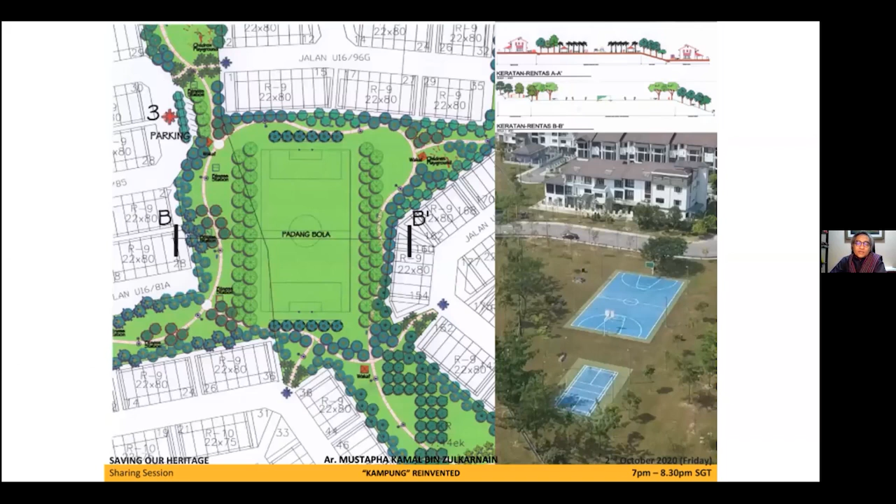The width of the open space has a hierarchy, and people can enjoy the lakes and have bigger parks in the center of the crossroads, where you can have a soccer field. So you don't have to drive to the park. You can walk, starting from your home. Anywhere is actually a park. That's why we call it Denai, because Denai is a green walking trail. You can have the soccer field, or even group courtyards for basketball or sepak takraw.

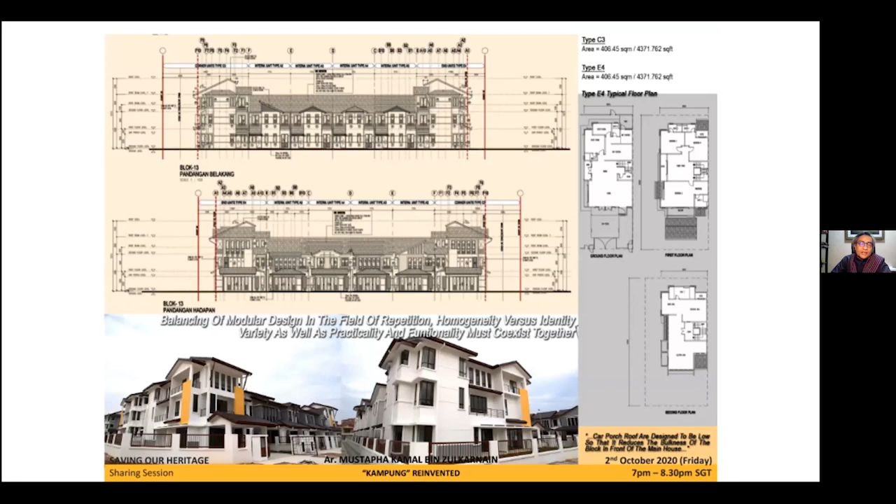With new housing, the blocks we do are short blocks so that you can have better cross ventilation between the units and clusters. This creates the feeling of the kampong breeze coming through, and the houses are all different heights so that you can have this importance in the terrain.

So these are, to look at kampong, the houses are never the same. So along the street, you see different houses in the same street. And if you look on the other side, the mirror image of it is not the same because it's different, even though the lot sizes are the same.

So this is where we try to use the uniqueness of kampong and the heritage, where it was once the beginning of settlements, to actually bring to the forefront the future of townships or future of human living, with better healing corridors. Thank you very much.

Thank you, Mustapha. It's really nice to see how kampong's now being brought back into the modern world. I partly grew up in Malaysia, and it's really fantastic to see that. And I totally agree with you. In the tropics, we get away from the sun by hiding under the tree. I remember that as I grew up.

Fantastic, thank you. We're going to now move on to our penultimate speaker. We go back up north, well, north as in the world, global, to Colin Ward. Colin is a senior partner at Foster and Partners in Hong Kong and has been responsible for many high-profile schemes, including the winning competition entries for the South Beach development in Singapore and the West Kowloon Cultural District. I'm pleased to hand over to Colin now.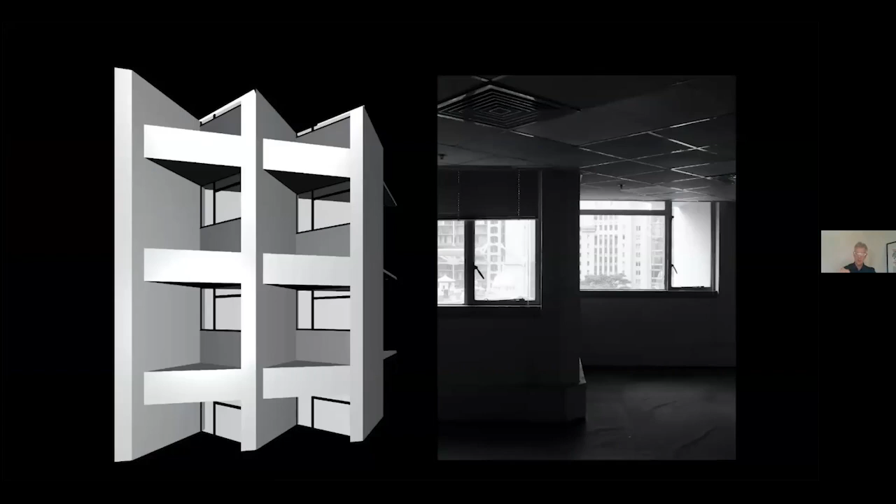The previous high windowsills were designed for an office building and hiding office desks and office files, but this was kind of inconsistent really with the more residential open feel we wanted for a hotel. So previously the windows were these old steel framed Crittall windows that we all love, and the height of them was defined by standard issue government office desk, plus one A4 folder, plus 1 inch, according to Ron, the previous

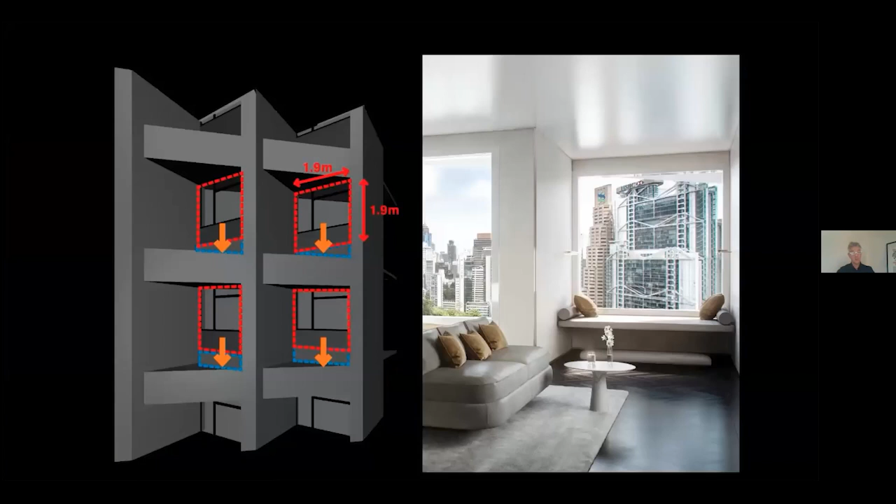architect. So working with Ron, the original architect and a committed modernist, as he always kept telling us, form follows function was all he was interested in, and good on him for that. He agreed a hotel room demands a more gracious window, a more intimate relationship with the guests.

We therefore changed the windows to create a series of frame views with a lower sill that enabled a number of different interactions with the outside world, from day beds in the hotel rooms, to views while you were bathing, to places where you could recline, to places where you could enjoy a view from your workouts, and finally also a place where you could enjoy a view from your sauna with one-way glass in the sauna, I might add.

For us though, we were struck by how profoundly sustainable reusing the Murray has been. No more months of demolition, spending years in the ground, agonising over a new structure. The Murray gave us all of this from day one. So we felt it was reasonable to ask,

Oh, sorry, I've lost my clicker here, sorry. Can I say next one, Stuart, if you wouldn't mind doing that? And we felt it reasonable to ask, how great a benefit is it to adaptively reuse an old building? Stuart, if you wouldn't mind doing the clicker. I seem to have lost mine suddenly. Stuart, then if you can hear me. Colin, we'll sort your clicker. I did hear you. Stuart will move your presentation. Okay, perfect. Great. So we can go to the next one. That would be great. Thank you.

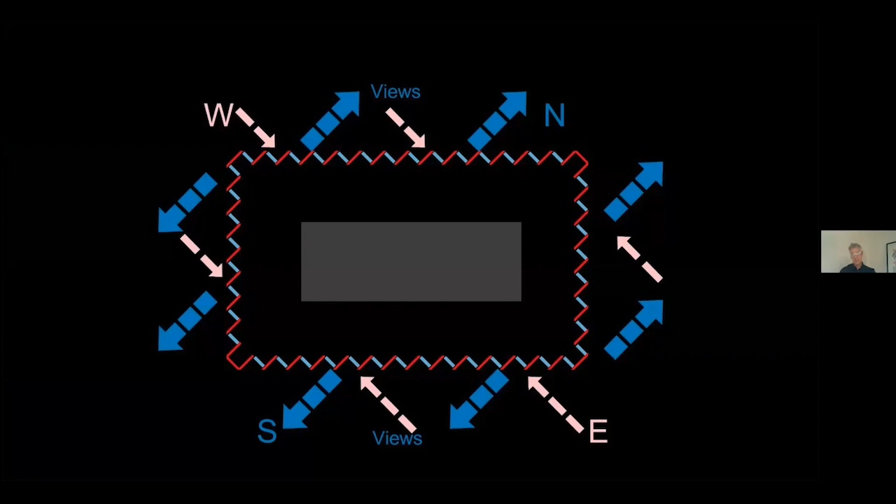Next one, please. But the Murray, on the other hand, does none of this. The genius of the original design, which has nothing to do with us, it's Ron's genius, is that the blade walls protect the building from the sun, shielding all of the glass. As you can see on this slide, the east and west sun hits the concrete blade walls. Next one, please. So when the sun hits the building, it is blocked by concrete, but where the sun doesn't hit the elevation, you get abundant views, as you can see on the left-hand side of this slide here.

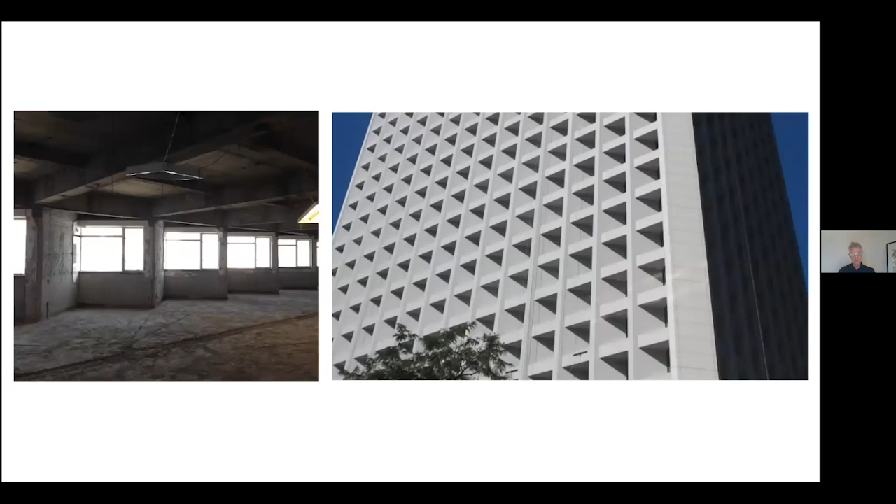Phillips designed this building 50 years ago, and we're still building greenhouse high-rise buildings in CBDs all over the planet. Ron showed us the correct way to build for an appropriate tropical architecture all those years ago, and we still don't seem to have learned the lesson very much. Next one, please. So compared to a typical Hong Kong high-rise building, how much better is the Murray than those glass buildings that we talked about earlier on?

So a space for study, a space for bathing, a space for leisure. Next one, please. And with only a 27% window-to-wall ratio, these spaces are still filled with natural light and give you fantastic views out across the city. Next one, please. But importantly, what this gives us is a 70% reduction in the total solar gains over a typical new build, one of those glass buildings that we mentioned earlier on.

Next one, please. Which gives us savings of over 400 tons of carbon each and every year. Next one, please. The equivalent of planting 500,000 seedlings and growing them for over 10 years. Next one, please. The last one.

So for us, I guess effectively the Murray's been so much more than simply working on a heritage structure for us as an office. It's been a complete revelation in a number of ways, an object lesson in stitching buildings into the whole historic urban fabric, the jigsaw of Hong Kong city centre, but also an exemplar of how to design in a climatically appropriate way for a subtropical climate in Hong Kong. And for that, we owe Ron, the original architect, an incredible debt of gratitude. We enjoyed working on the building with him. That's my last slide. Thank you for listening.

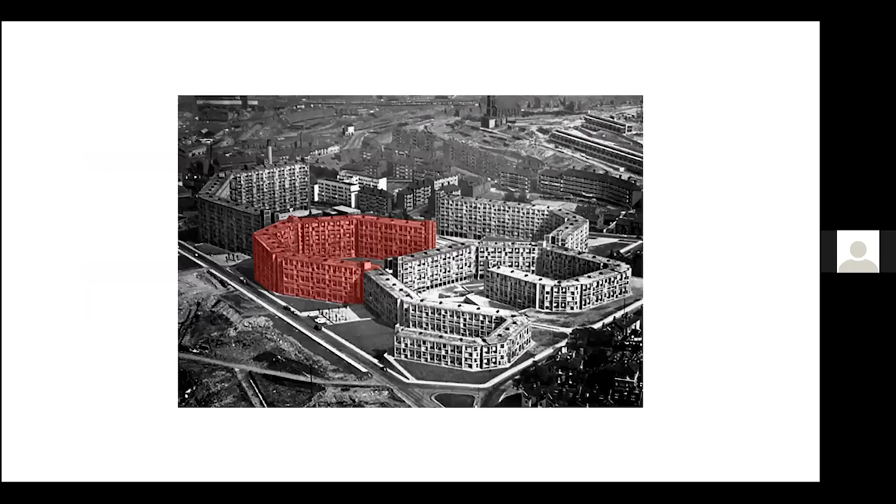Oh yes, okay. So Park Hill was completed in 1961. It's 1,000 flats, and we're working on phase 2, which is 200 flats and 6,000 square meters of commercial space. And it was one of a series of social housing blocks that was built by Sheffield City Council. Quite a phenomenal achievement. They completed 4 schemes within 7 years of each other, over 3,000 flats in total. Most have been demolished. This is Hyde Park, that's gone, and Kelvin, but Park Hill was saved by listing it.

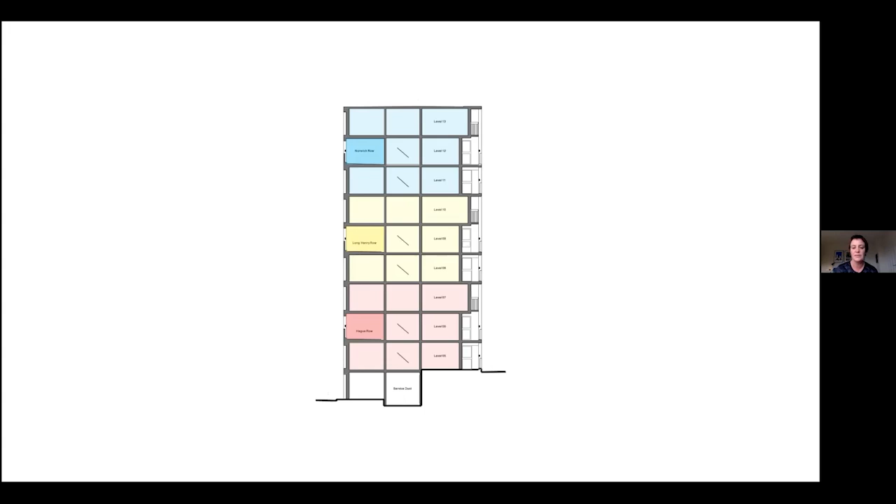It's a streets in the sky proposal, which means that the streets are lifted up. There's a street every 3rd floor, and you either go into your flat and up or down into your flat. And it was a kind of citadel, really. It had everything there in its beginning. It had schools, shops, and it was incredibly successful. So much so that it was copied not only across Sheffield, but in Manchester and in London. 10 years later, the Trellick Tower was built.

So it started its decline really with the loss of jobs and mass unemployment in Sheffield, and it became a notorious sink estate, and it's a building that still is either loved or loathed. And because it was listed, it was probably going to sit there and do nothing because it's such a phenomenal job to restore a building like this. But Urban Splash stepped in and they did phase one by Hawkins Brown and Studio Egret West, which completely reinvented it. And it was an incredibly successful project.

And for phase two, phase two adjoins phase one with those bridges, and Urban Splash decided to run a design competition, and we were selected on the shortlist, and they did an unusual thing of giving a flat to each of the contestants. And because we had studied the building, we noticed all these traces of things that people had done to try and make it into their home. There were lots of coloured balconies, balcony reveals, and so we took this and decided to put coloured insulated panels on the reveals as people had done themselves, so they could recognise their own flat.

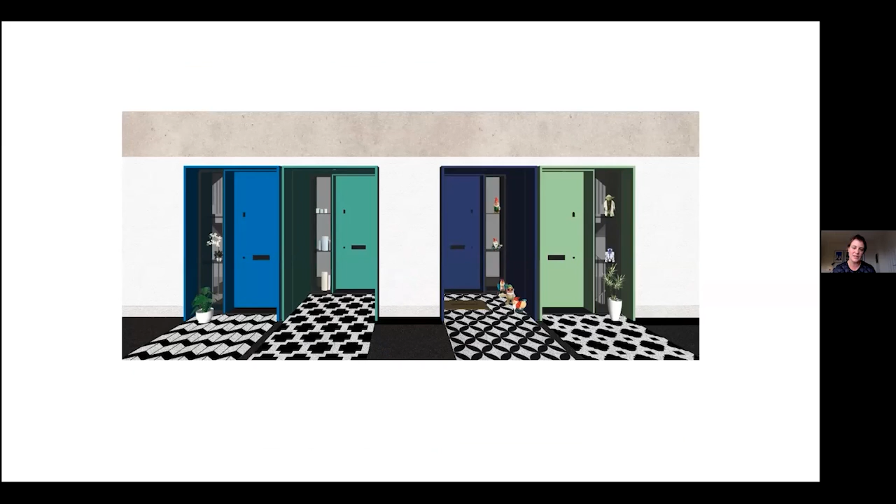Everyone has their own extended front door mat to try and give more defensible space. And we've also introduced glazing, so there's more overlooking onto the street, because that was incredibly problematic. And what's great about having an existing building to work with is you can actually do mock-ups really easily on site. So we've been painting the reveals and trying out different colours as we go along.

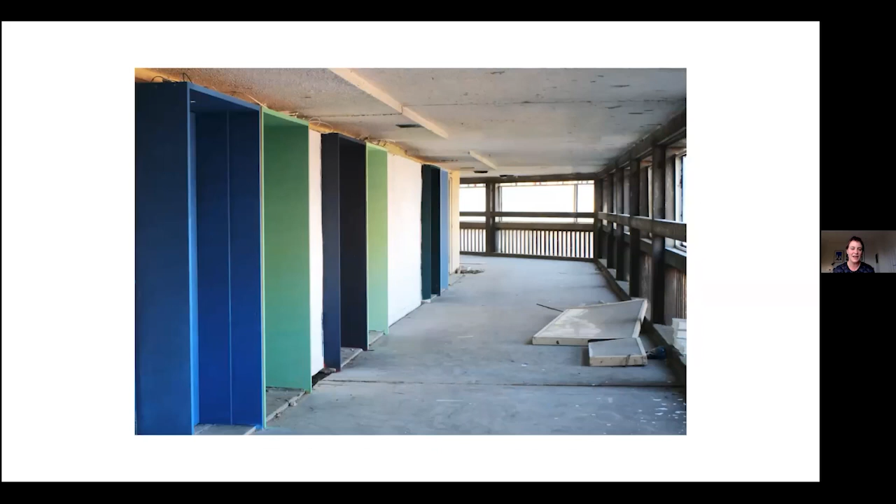And so really our idea is kind of different to phase one. We're saying that from the front, Park Hill looks like Park Hill. We're keeping the bricks. They're in good condition and we're insulating behind them. But as it turns the corner, that's where the colour is introduced. And the colour's been a big debate. I think we're finally there with it.

And that's it. Oh gosh, now I've gone on to, right. Can I go back?

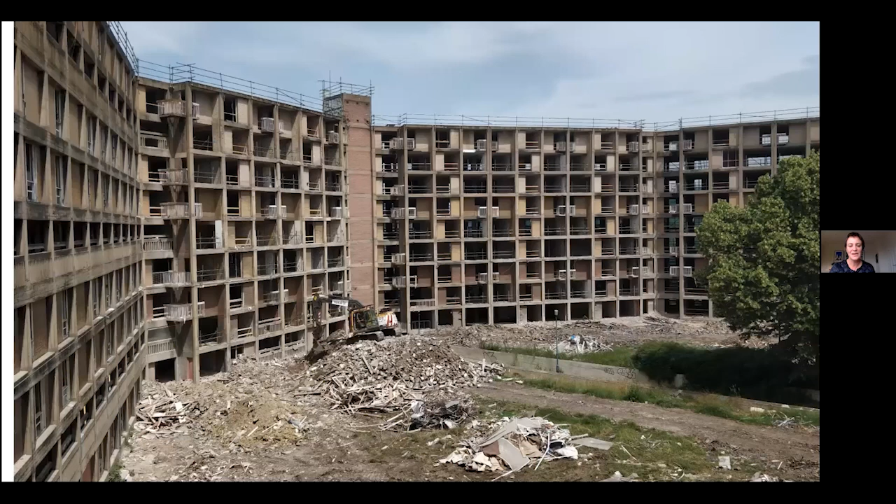So that was it about 6 months ago. And now the windows are going in and we're about to start applying colour to it. What's incredibly exciting is they've also completed phase 3, which is going to be student housing. And they're about to start on phase 4, which is going to be a new art gallery and artist studios and more housing. So this place has been reinvented and it's a massive success story.

I was a student in Sheffield and this building was then declining already and had become kind of synonymous with the failures of modernism to solve the housing crisis and produce housing. And I'm absolutely thrilled to be part of its rebirth. Thank you.

Thank you, Annalie. I live in Yorkshire and I go to Sheffield quite a bit, so I see the building very well indeed. And as you say, it's a Marmite, but I think it's being loved much more by the community. It's one of the first things you see as you come up from Sheffield, and it's fantastic. Thank you for that.

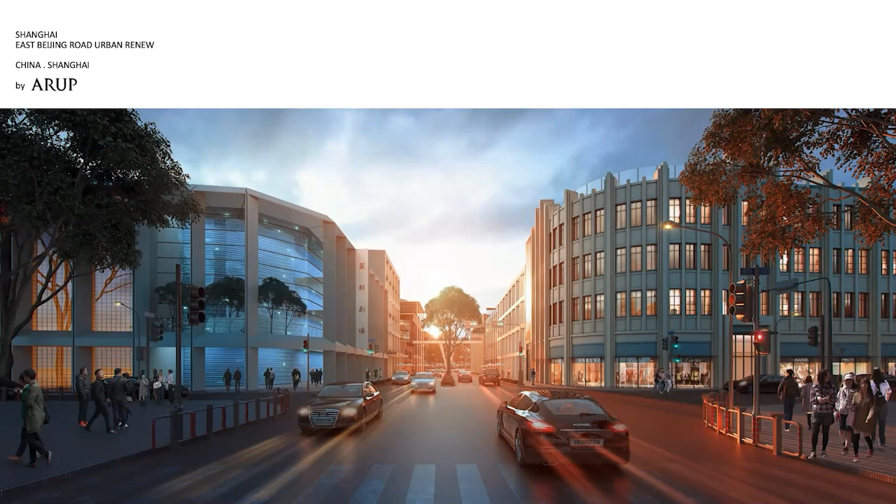Now, we're going to try to go back to G for our third attempt. Third time lucky, they say. G, you're there. Fantastic. G's not going to turn on his video to try and enable us to connect with him. So G, over to you. Okay. I think I will give the control to you to go to page 10. Hi G, Stu here. I'm standing by. Just say next and I will change it. Okay. I still see my name page now. Just hold on a second. Can you hear me clearly? Apologies about the connection issues. Yes, we can hear you clearly. I think it's just taking a few seconds to update your end. Okay, the first page is super slow for my end. It's a little bit weird. So we're all seeing a slide with a moving car. The moving car. Okay. You're on the first one, G. Do you want us to move? Yeah, let's move down to page 9.

Sorry. Build as new. Respect for the original function. Okay. You can see the building on the original photo. This building 100 years ago was actually quite modern in its language. But unfortunately, in the 1990s, the building facade was demolished, and you can see from the picture on the right side, it's become quite an awkward, fake European style, and also the function has changed.

Originally, it was a very important theater in Shanghai, China. Nowadays it's a hardware market inside, and the government tried to restore the function back into this building. So we can see the whole building already lost the original design and aesthetic, and also they added one more floor on the top. So we used modern language, modern design, combined with the functions, to create a totally new building, a new facade, but based on the original facade geometry and expression. What we call it is respect the original functions.

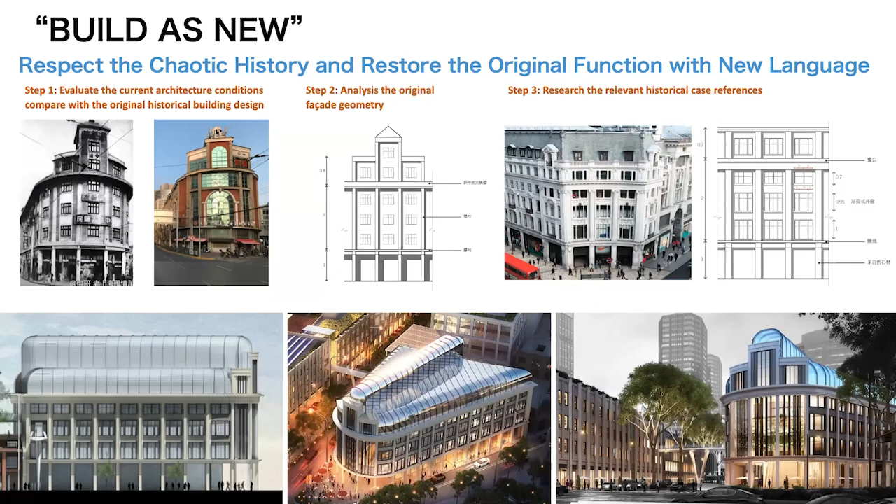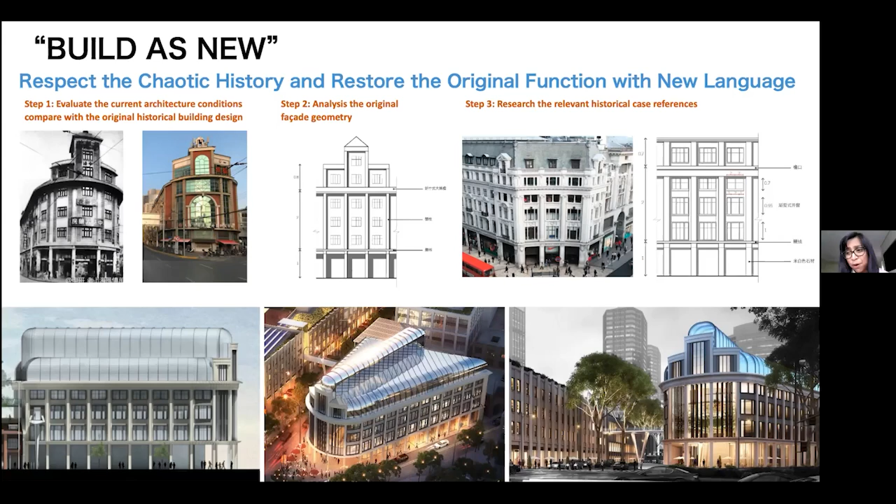I believe we've lost you again. I think we have. Apologies. I think we're going to have to move on now because, G, if you can hear us, I'm very sorry we've lost you again. We will certainly come back to you and share your presentation with the audience. Everyone, I apologize for the various challenges we've had with the IT. But I'm sure you understand it's one of the challenges, isn't it? We're connecting virtually, but we've had some fantastic presentations and it has been an absolute privilege.

I don't want to leave without asking at least two questions. I'm going to start with the first question from the audience today, and I'm going to direct this question. The question is, should architects consider the post-colonial status in the restoration of heritage buildings that come from a country's colonial history? By restoring colonial architecture, are we at risk of celebrating the heritage of colonialism instead of the heritage of the people that were colonized? In what way do you as architects feel that we can mitigate this? I'm going to go to colleagues in Singapore. Peng Beng, are you comfortable to answer that?

Yeah, I think the way we see this was to look at the connection to our past by trying to understand a larger pattern of movement. So rather than seeing culture as a static moment in time, we try to see culture and history as a flow that is unfolding and alive. So the architecture act for the present is charged with new possibilities. So rather than seeing the separation between the colonialist and the colonized, we rather choose to see it as an integral development over time and across time, so that what was once perhaps a military place could now become a